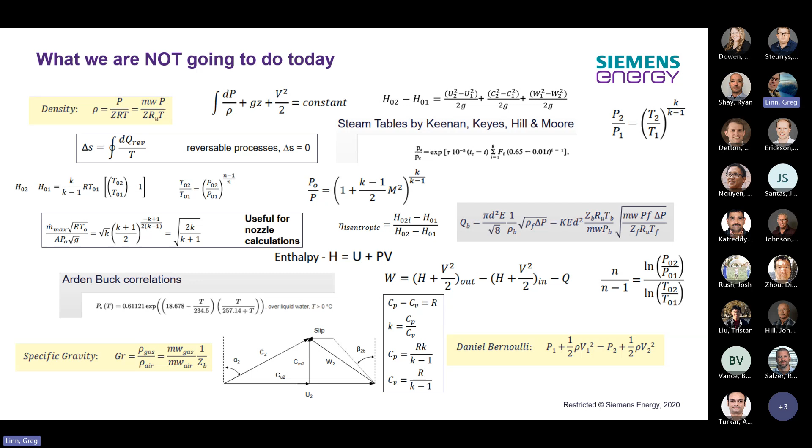By the way, since I see new people, I am an old person. My dad was working here, and he's the one that - when they went into a production meeting, they wanted to play a joke on, I think it was Jim Beeson's car - they took his car keys and actually drove the guy's car into that compressor without his knowledge. He came out of his production meeting, and the whole meeting just walked behind him, and he's like, 'Why is everybody following me?' Then he's like, 'Why is my car in the compressor over there?' So, anyways, I've been alive for a long time, even though I may look younger.

Okay, what are we also not going to talk about today? Customers talk about all the things on the outside of this bubble - obsolescence, reliability, all that stuff, right? But we sell compressors to them and we have to solve their problems, so I'm remiss not to mention that compressors do those things for the customer. They don't really talk about the insides too much unless they're having a problem with it. So we're the bubble. We talk about, from a revamp perspective, upgrades - that's anything mechanical on the compressor, right? Bearings, seals, you know that. But the rest of that bubble that I live in, revamp land, is head, capacity, and efficiency, and that is performance.

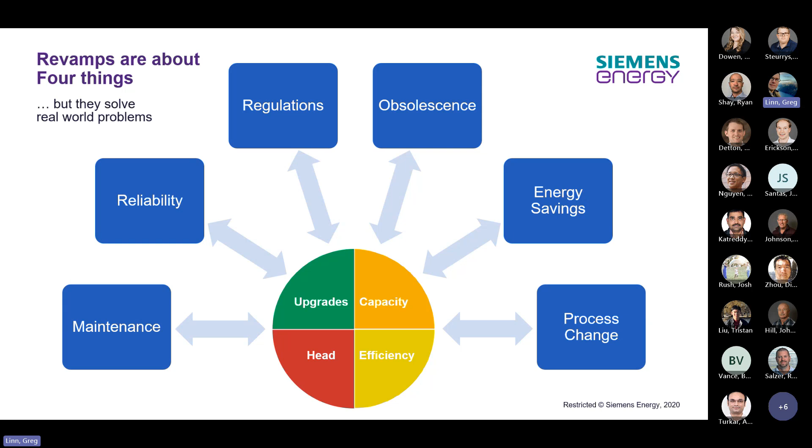So 3/4 of the bubble is performance in my mind. In reality, that's a very small sliver. There's more mechanical stuff that goes on with a compressor than performance, right? But without the performance, you don't need a compressor. So that's how it looks in my brain, a very simplistic bubble.

The other basics of performance, you got to remember this. It's super simple, guys: 5 inputs, 2 outputs, or any of those outputs, power and speed, can become an input. But you got 7 things you're doing. Capacity is this middle thing, flow. The head and efficiency is all baked into this. Pressure, suction temperature, mole weight. There's a discharge temperature in there. You could say that's an output, but these are the inputs, and that's typically the output, power and speed.

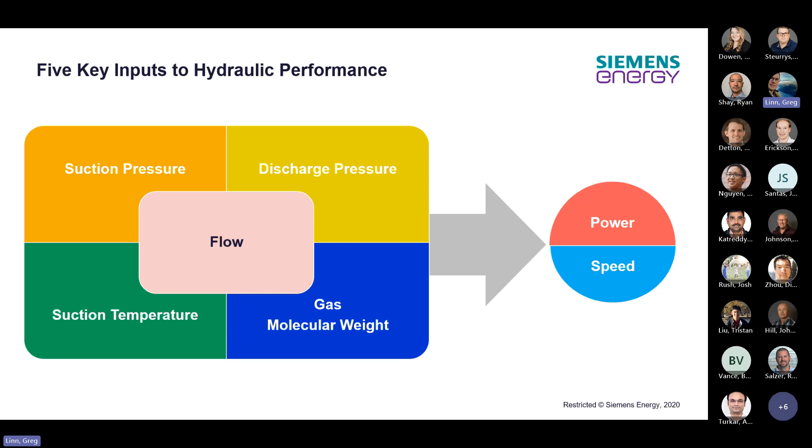Okay, this is what it looks like. Now, the focus of this presentation is either going to be talking about the components in the compressor that make performance, or talking about how we speak about performance to a customer.

Sometimes they'll say, 'Well, how much head are you making?' Nobody's going to say that. They're going to say, 'I need to go from this pressure to that pressure,' right? No one's going to say... there'll be a few people who say, 'Well, I need to make 50,000 feet of head.' They're rare, okay? But this is the way that you talk about compressor performance.

And on the right-hand side of this screen is the head equation if you're a piece of gas and you need to get from one place to the next. And that's how the customer's going to say it: I need to get this gas to that place, that's pressure 2 versus pressure 1.

And I got this gas that's baked in the R equation, right? That's your mole weight, and it's sitting there at whatever temperature. And baked into this is some efficiency components and other high fluid stuff. I told you, we're not going to do the math. That's the equation, there it is.

On the left side of the screen is a really easy one. That's the compressor side of the head equation: Mu, which is the head coefficient, U squared, which is the tip speed of the compressor, and G, which is the gravitational constant. That's it.

But you say, well, what's the head coefficient? Well, that's a very complicated thing to go and calculate, okay? But each compressor has a mu value, a head coefficient. Inside the compressor is multiple stages, and each one of those stages has a mu value. Okay, so I'm not gonna peel into this a lot, but I want you to have that impression that this curve could represent a stage, it could represent a section of compression, or it could represent multiple sections of compression.

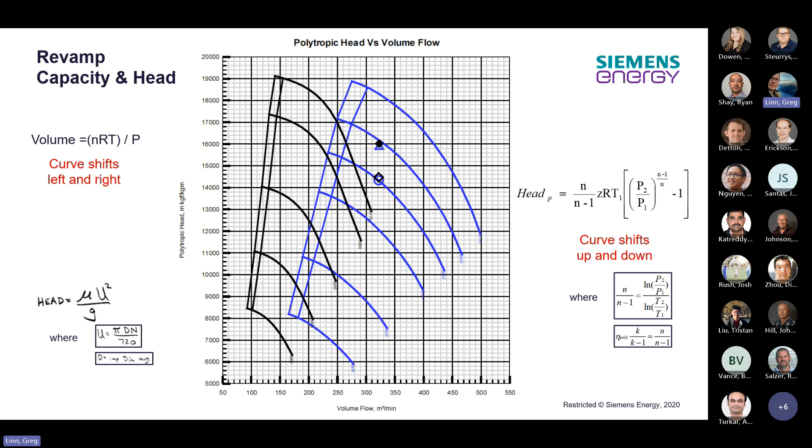Within limits, I got some other graphs, we'll see how that varies. And you can plot them over top of each other, and it gets a little fuzzy. If there's massive changes, and I don't have this in here, there's a curve that tells you how long that will stay accurate for. I didn't put that in this presentation. That's why I said the presentation is not done. It'll probably get in there eventually.

Okay, so what is compression? I was going to get that little picture off the internet where everybody compresses the cans, right? Where they heat the can up, they put hot water in it, and they have a bowl of cold water, and then they turn the hot can over into the cold water, and then it crumples. Okay, you just saw it in your mind.

But that's what's going on here, is that you take gas from one pressure and temperature and energy state, and you take it to a higher level of pressure and energy, okay? And you compress it. So we're going to visualize that a couple different ways. So head: specific energy required to compress a given volume of gas from one energy state to another. Capacity is how fast you're going to do it, okay?

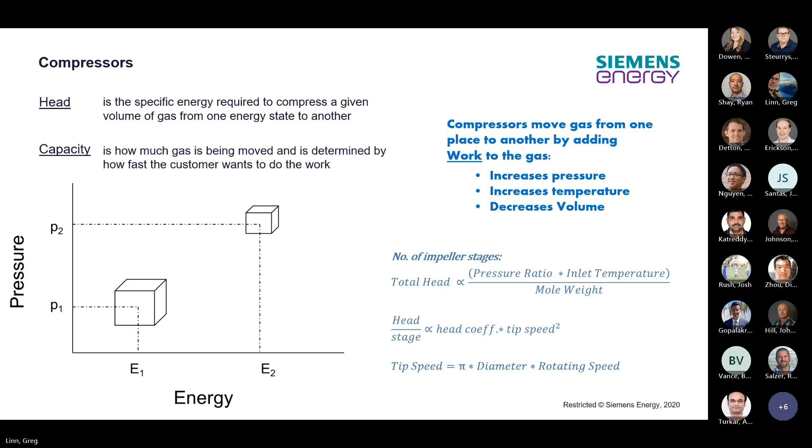Does anybody know what surge is? When you want the gas to go one way, but it goes the other way. Makes a lot of noise - can make a lot of noise, or it could be silent. It can be very damaging or it might not be. Depends on the energy level that's in there.

When I started, when I was a new person, they sent you out to the test stand - we don't have a test stand anymore. It was a very memorable experience. First, if you were a new person, they give you a dry bulb and say, hey, we need this reading, and they make you go up on top of the compressor to turn that. That's just to measure that you're actually a new person and that you don't know they have instrumentation to do that - you don't need that. But I've done it, and it's fun.

The other thing they typically do when you're new is when they're running a compressor, they will go into audible surge with a customer's compressor. It's probably not recommended, but they just want to see how far you can jump. If you're standing right next to the compressor and it goes into a surge event, everything shakes. You think you're in an earthquake, you think there's a jet going by at Mach 1. It's crazy - there's noise and energy everywhere. That's a surge event.

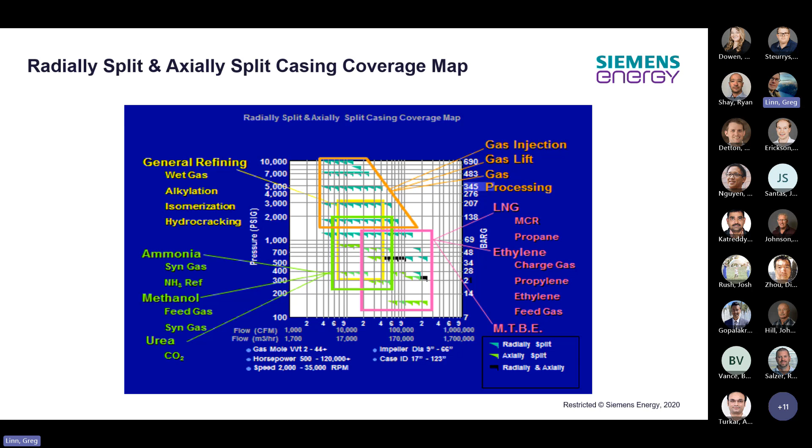The gas has to get in. You have to do some work on it - you have to compress it. And then it has to get out. If you forget to get it in or forget to get it out, you fail. Our biggest problems in the last few years is when people forget these things.

At Hilcorp, we decided to make one of the output things more like a valve, and they closed the valve, so the gas couldn't get out. We did some amazing compression inside that compressor, but it was terrible on the test stand. So don't forget the ins and the outs - these two holes are the most important holes on the compressor. I don't care what rotodynamicists and mechanical guys tell you about oil holes and vent holes being important - these two are the most important. Without the in hole and the out hole, you don't have a compressor.

And impellers are important too, so let's take a look at what they look like. These things are called impellers - they're here on the shaft, right? We all know that, and we're not going to bear down to those levels of things, we're going to stay on the flow path. But the impellers are the prime mover of the gas - the coupling imparts torque to the shaft, which imparts torque to the impellers, and they spin.

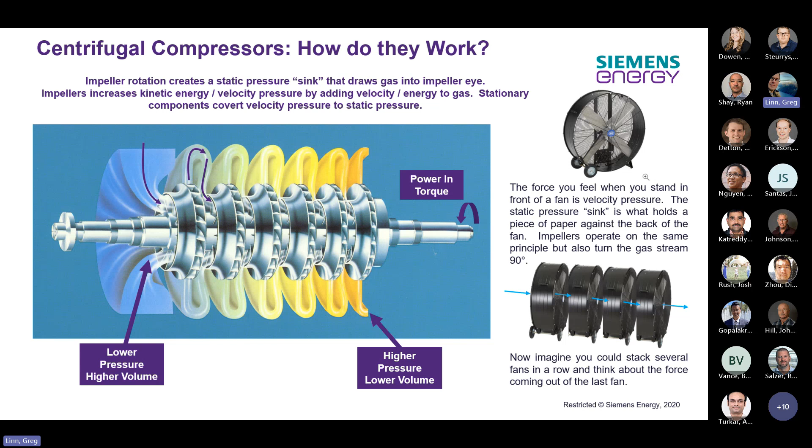This was a Jim Soroka slide, and there's a series of fans. He says, think of each one of those fans as an impeller. I mean, it is - it's just an axial impeller. They usually call it fan blades. There's blades on the impeller.

This is another view of it. This is when the gas goes through. This comes out of the compressor basics spreadsheets and presentations. You'll see a lot of that in here. I just want you to have a few slides that let you visualize the flow.

Oh, you can't see that. Is there a way I can put it? Look at that, I can if I turn around. Okay, excellent - so this little portion right here is where the eye of the impeller is and where the gas particle might go into it. Well, now I can't see it.

So that gas is going right directly into the page. When it gets to the impeller, which is spinning, let's say, at 10,000 RPM, it's going to go around that probably once or twice - it's not going to go from here to there. It's going to go all the way in a circle, but it would eventually go up the pressure side of that blade and then exit the impeller. This is a representation of what the gas particle is going to do, but it's going to move faster and faster as it goes. So when it gets to this point, there's a component of motion that is out away from the impeller, and there's a component of motion that's tangential with the impeller's rotation.

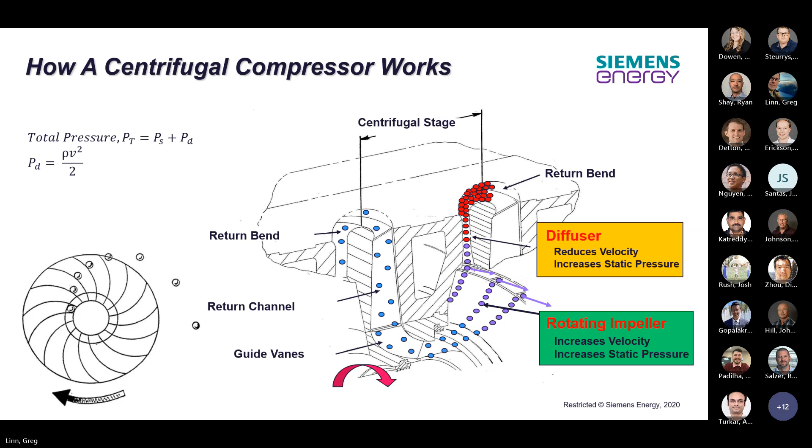I'm going to turn around again. We're going to talk about stages. You have to have a visualization of what a stage is and what the boundary layer for that stage is. This is one of those things that talks about as it goes through the compressor. This is not a representation of a stage - this is several stages, and it doesn't even show where the end is.

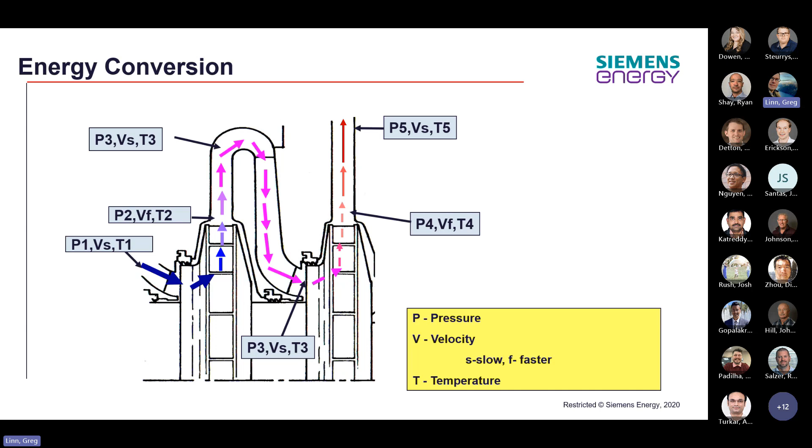That gas that's leaving the second impeller there is leaving the compressor - it's probably going to a volute. We're going to talk about all these components and what each one of those things is doing in the compressor. This is another picture of a stage. They represented this entire thing - the blue area, the inlet guide area, that's a portion of the upstream stage, so that's not a stage. It's a stage and a quarter because it represented an inlet guide, then a stage, and it has the inlet guide of the downstage.

So a stage, and here's a picture of it a little bit better. It goes from the leading edge of the impeller through the diffuser, the return bend, the return channel, and the inlet guide following the impeller, right up until the next impeller. Or if it's leaving the compressor through its volute, collector, flange, you name it.

So a stage of compression is from the impeller through to the next impeller. I'll give one caveat to that: there is leakage. Whenever you have a rotating piece and a stationary piece, you're going to have a seal. There's a labby seal, really tiny on that picture, but over here on the right you can see the little spiky things at the impeller eye cover. That is a seal, and there will be leakage through that.

So we're going to back up. If you look at the diagram on the right, there are station numbers. 1 is at the impeller entrance, 2 is at the impeller exit, 3 is at the diffuser entrance, 4 is in the middle of the diffuser, B5 is at the top of the diffuser, B6 is at the end of the return bend or the beginning of the return channel. B7 is at the end of the return channel, B8 is at the end of the inlet guide portion. There's a section mentally called 0, where we begin, right before the flow comes in. So at the end of the inlet guide, right before the impeller starts, there's a 0 station. There's a 9 station too, but 9 is equal to 0. So that's a stage of compression.

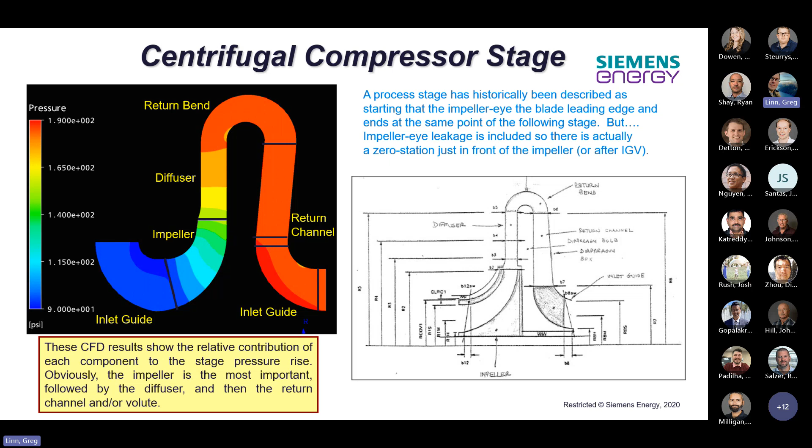If you represent a compressor, we're going to show you a CX curve, what we call the CX curve. I don't know, did Cooper have a name for the head coefficient and efficiency versus Q over N?

The head coefficient, you just call the head coefficient curve. It's a dimensionless curve, we have one of these in here, but we called it the CX curve. I never knew what that stood for, but we called it that. It's a little short acronym.

Station 6 was at the top of the tunnel, at the top. Station 7 was at the entry to the channels. John was explaining that at the top of the return bend, they had a station - there was a 7 and 8, and a 9 was probably where our 8 was. And if you go to Duisburg, which is a 4-letter word if anyone's counting, they have slightly different stations, but they do a really nice job.

They have a spec that dictates every single one of these flow path components. So we're going to talk about each one of those flow path components, get you ready for their specs and how they define them very, very well. They define each and every component, but you need to know what they do. That's the focus here: what does each one of these components do?

So this is a picture of a stage, and I've said the names, but here it is if you ever need to reference it. I don't think there's anything else shown that needs a picture or a name other than maybe the shaft. Don't forget the shaft is under.

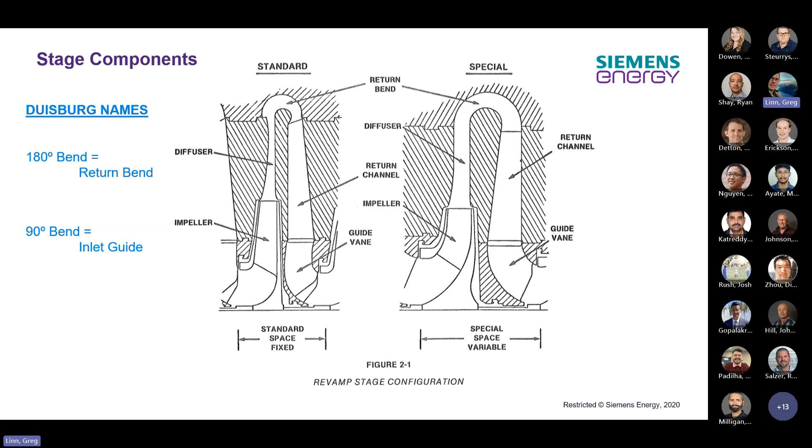Okay, here's yet another representation of this. I like this, Tang had this in his presentation. I thought it was really great because you don't often see this.

So you go, what's static and total pressure? Remember, I'm not a smart guy, but just remember, static pressure is what you might measure with a gauge. Total pressure is if you get gas moving, there's energy in that gas. So there's a total pressure. I never got to the point where I understood it. Doesn't matter to understand it because you can make it through your entire life without understanding. John probably understands it, but we won't get into it.

The pressure you get if you stop the gas. So it has energy in it, has work put into it. So the gas goes really fast right here at the exit of the impeller. And then through the diffuser, what are you doing with the diffuser? We'll get to it, but you're slowing the gas down to recover pressure. It's called pressure recovery in that device.

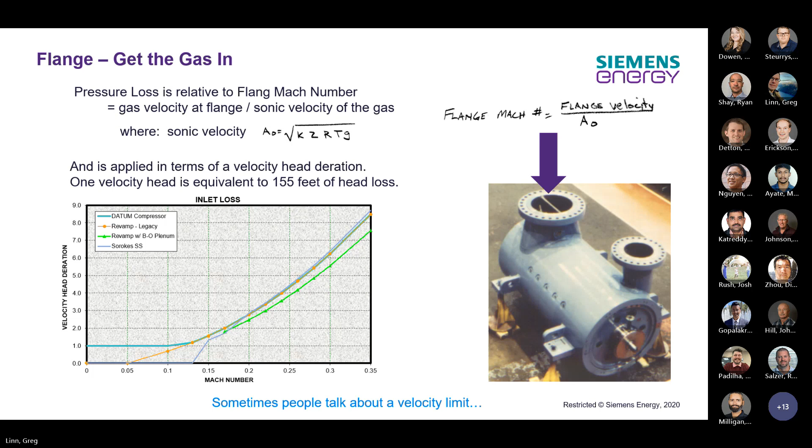You don't want anything to turn. You don't want to go around a 90-degree bend inside a compressor. That's less efficient and you get pressure loss, just like flowing a pipe. So you're going to see things that I term as called sexy. The sexier it looks, the better it is. That's just the way compressors are. There's no other way to put it. Yes, Joe.

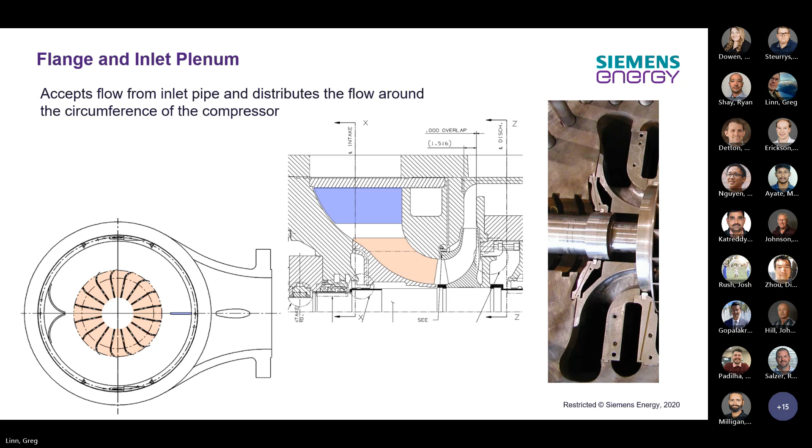More views, I like pictures. They say pictures are worth 1,000 words, so I've got about 5 billion words in this presentation because I just went and got a lot of pictures to talk about. There's the words on the screen.

Let me break this down: splitter vanes, plenum vanes, seagull vanes. There's a lot of variation in these designs. These are some old ones, but they were very important. This was a high flow machine where they had performance problems and separation of the gas. They used to do it this way.

I've seen many configurations of having these additional plenum veins in there. Sometimes they need to split the gas, and it really comes down to the designer. There's different aero people, different product people, and there's reasons to put this stuff in. I won't say I was ever privy to all the thinking of why they did it, but I'll show you one picture in the next slide of why sometimes they're put in there.

If you see this, the innermost set of veins looks like a little star, a weird star with many points. That's the inlet guide vane portion. Immediately outer of that is a set of veins - let me see if I can point at it - so this set of veins there. I want you to note the shape of those, because I called them finger vanes. I think that was kind of the Dresser terminology for it.

The finger vanes are catching gas as it goes around the plenum, and it's uniform, but not all in the same direction. As soon as you get inside of the guide vane, you can see these are all uniform. But these finger veins have to have a little bit of turn to capture the gas.

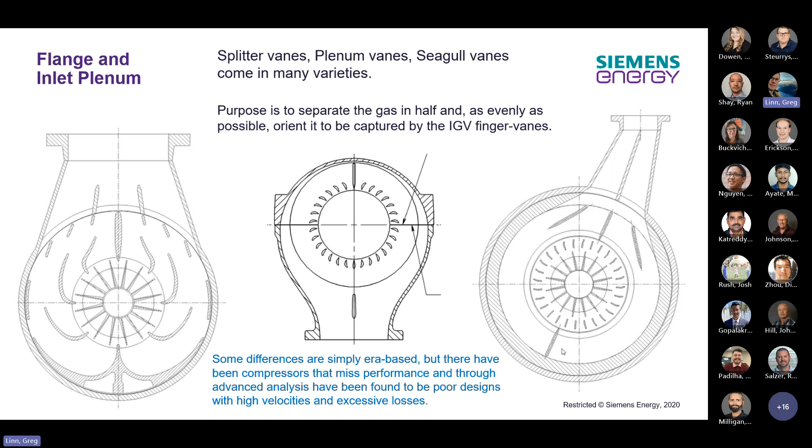The splitter vanes at the bottom, as gas gets to the bottom, it says hey, stop going this way, I need you to turn and go up into the impeller.

I didn't finish the slide, sorry. But here's another picture where they said, hey, we're going to get rid of the splitter vane and go to a seagull. That was a really popular thing that Dresser Rand did - we use seagulls in all the datums. And I think it's a pretty good design.

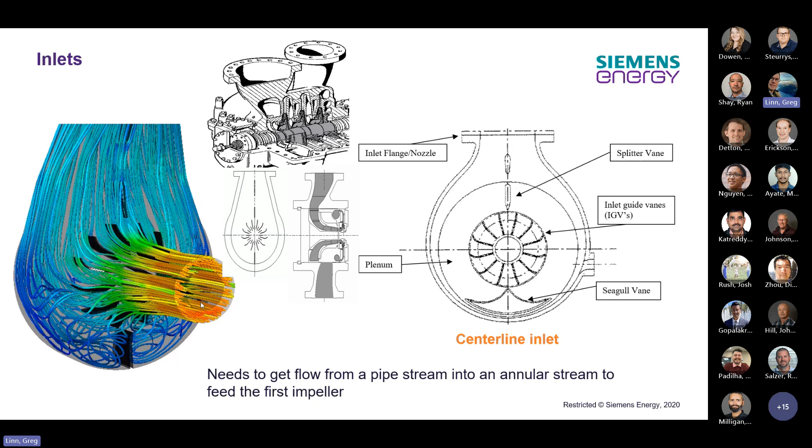I don't have a picture of the flow with a seagull, but I can envision it being way more smooth and creating less of a pressure differential top to bottom.

But you can see that they have a variation, even though that's just an inlet guide. There you can see it has the finger vane shape to it, catching gas coming down each side of the plenum.

Getting the gas from the flange to the first impeller, you can treat that like a valve. We're going to see something called movable guide vanes - you can literally put a valve right in your compressor.

If you don't design this with intention to keep the gas moving smoothly, and don't accelerate or decelerate too fast, you'll ruin the performance, okay?

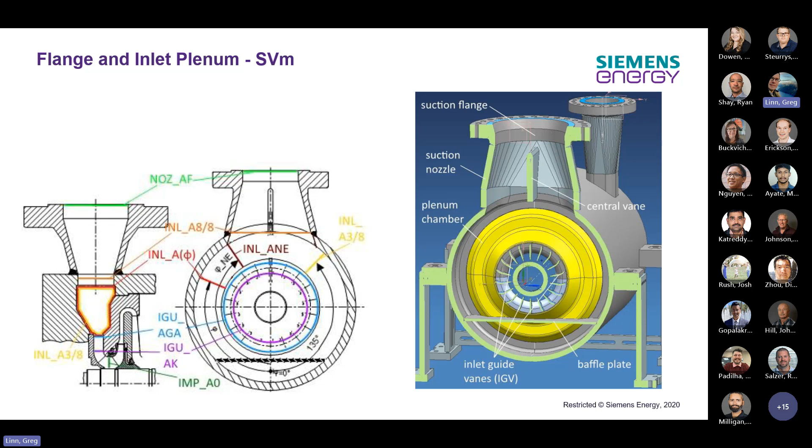Another picture of that, and why I included this duplicate, is that in Duisburg, in their specs, they started to put these rough guidelines in. So you'll see a few pages of this where they say, how much area should you have here, or how much area should we have in the plenum? They start giving some rough approximations in relation to the impeller eye area.

So your first stage, this is the first component you're actually going to measure when you get into Smart Perf or any other performance program. You're going to say what's the capacity the customer needs, and you're going to take the volume and size the impeller for that. You're going to try to determine a tip speed and set a capacity. Q over N is the measure for the first stage.

That area of the impeller, working backwards, if you're new equipment, sets the size of the plenum, the inlet guide in front of it, and it'll set the size of the flange. You can say, well Greg, you said make sure the flange is big enough when you start. Okay, but that's not how they do it in new equipment land. They size the impellers first, and then everything goes backwards out to the compressor.

Another closer version of that, and you probably live in the world where product people see this through the design of the compressor, is they'll measure the area coming through that inlet guide vane. So this one has a little horizontal dash line. To me, that's the break line of where you've got the finger vane part and where the guide vane part takes over. So that's the primary purpose of an inlet guide.

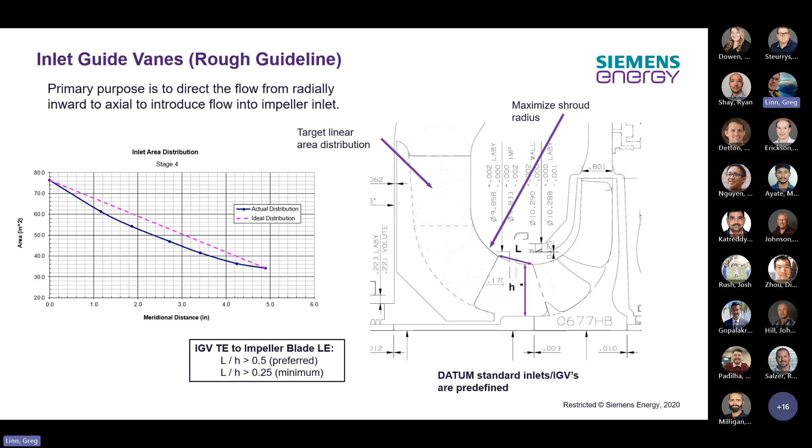The purpose is to take flow that's directly down the page to directly left to right in the page. Now there are times they don't. The finger vanes, we've been talking about that a lot—that's when the gas is not going directly straight down the page. When you get to the end of a diaphragm, you'll see a difference in that guide vane, because the return channel presents the gas straight into this guide vane portion. The guide vane also may decide not to keep the gas straight, okay? And I've got a slide on that.

The plenum area and the inlet guide—when you need to take up some axial stage space in a compressor, this is primarily for revamps or for new equipment that has a future build. I've seen compressors with extra stage spacing built into it for the future. Here's some examples of what that looks like.

If you want to make it a science, you could say I'm going to do a CFD of this bridge over, and make some decision points in the contract to decide what's the lowest amount of loss I could get. That's an awful lot of effort. That's an awful lot of time.

If you're going to do it, I know engineers, they love to change something. So you come up with a concept, you do the CFD, and you say, well, it could be better if I did this. Well, that is more time, and you might already have your parts on order. If you want to make a bridge over that looks like the top picture, that's a whole different mess of material and cost than if you looked at one of the bottom pictures, right? So you can't CFD this and conceptualize it during the contract. You can, but it slows up the contract.

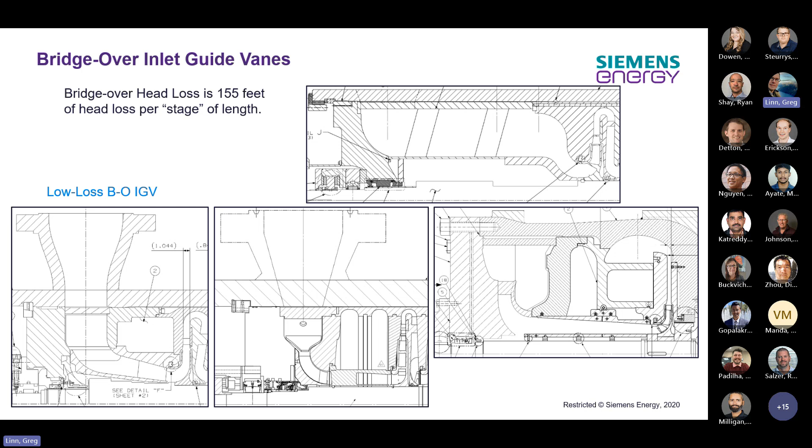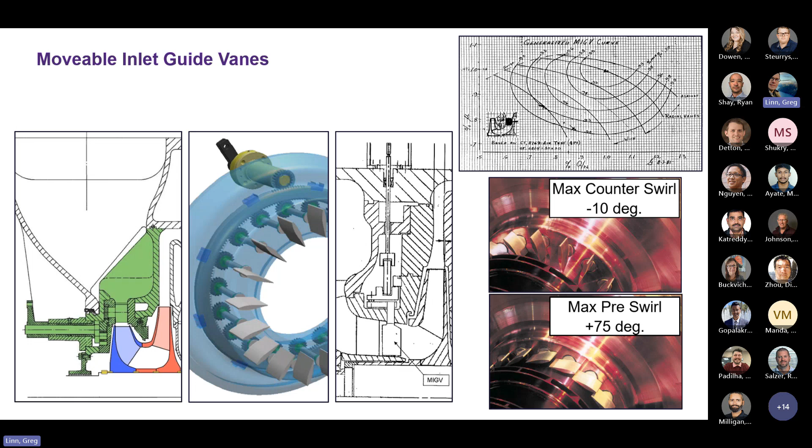So the guide vanes have a purpose and they should be sold more often, but they're not. They're only using single stage compressors. A lot of those in Duisburg where they're doing those 4-poster machines still, every single one of those has a movable guide vane because it's so integral. They can make a massively controllable compressor, they can run all over the map, right, by using these adjustments.

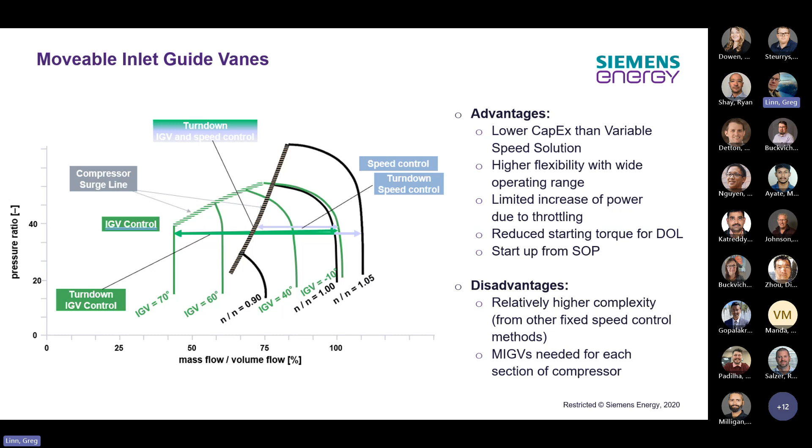But putting a movable guide vane in with a multi-stage, multi-section machine, let's say if you had 9 stages, you're only affecting that first impeller. So you still have volume reduction effects, and we're going to start talking about volume reduction, and you'll see it's not really conducive to putting a movable guide vane on 9 stages. A movable guide vane with 1 impeller, super, super productive, right? A movable guide vane with 9, it's not as valuable.

So it was a mixed flow that we built a radial diffuser on. The mixed flow impellers is where they say you start losing efficiency a little bit, but still very efficient compared to some of the low flow impellers.

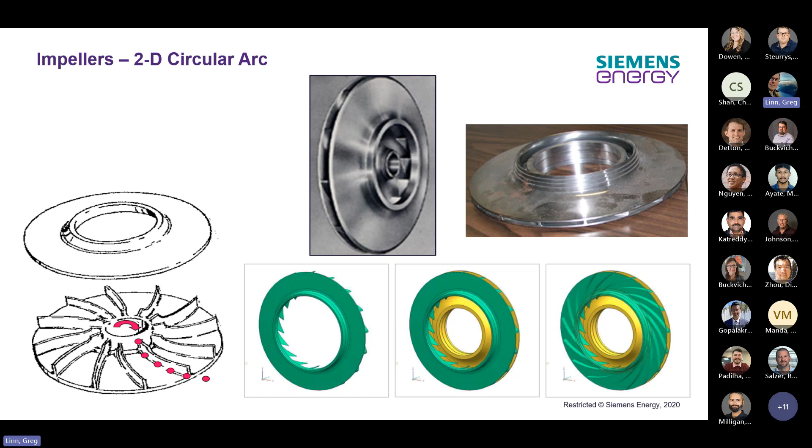I don't have anything more to say about that. Jim Sorokes used to call them arbitrary blade shapes. I'm sure that was his own term, but he talked an awful lot about that, about blade shapes, and he would say, oh, what impeller? He had conical, he had several different terms. I'm not well versed in that, but I heard them all my life. I know that the arbitrary one - if you get into Duisburg, they call it knowledge based, and they've got these vanes doing this type of thing. When you get to high flow, high efficiency, you're going to see an impeller with a lot of back sweep to it, and the more back sweep, it changes the head profile, changes the efficiency.

One of the things I think was on that slide - the impeller is the only rotating aerodynamic component, and it's the only component that adds energy to the gas. So that was the key point from that slide. The impeller is the key. Jim Sorokes used to say, impeller efficiency.

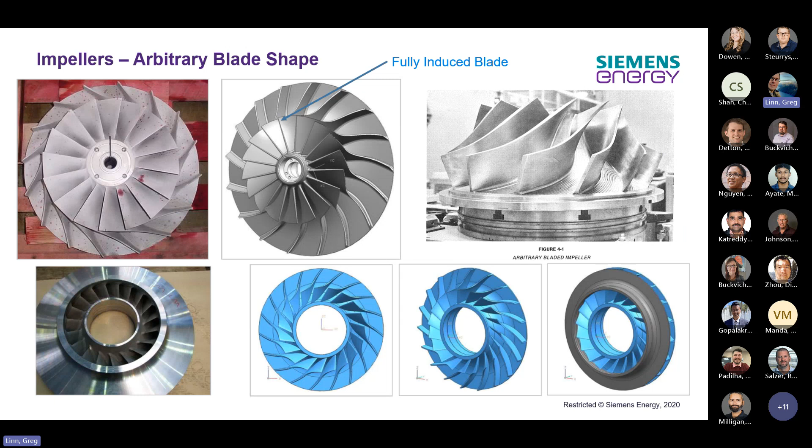Does anybody have a guess? I'm sure you understand it's higher than stage efficiency, right? Because it's really good efficiency. It's not 100%, but 96% is an average impeller efficiency. The stage behind it will drag it down to sub 90. But the impeller itself is really efficient.

Some of the things that drag it down - let's start talking about this. Diffuser vanes - what is a diffuser vane for? It accepts high velocity, high kinetic energy gas from the impeller. It begins to convert it to static pressure by slowing the gas down in a very controlled manner.

First and foremost, as the gas leaves the impeller, it's going to go up in diameter and slow down naturally. Just through the diffuser, that's the thing. But then we contain this with walls in the diffuser passage, as a shroud and a disc side of the diffuser. The diffuser can have shape - you may see some that look straight, and some that taper. That's the aero person saying I need to change how the gas is slowing down.

Tang had this one - it was big for him, and I think this is important: no negative overlaps. You don't want the gas coming off the back side of this impeller and slamming into a wall. That will ruin performance, so alignment's critical. As you can envision, the more narrow that impeller gets, the more critical the alignment to the diffuser is. If you're in a back-to-back compressor, it gets near impossible to get alignment to all the stages.

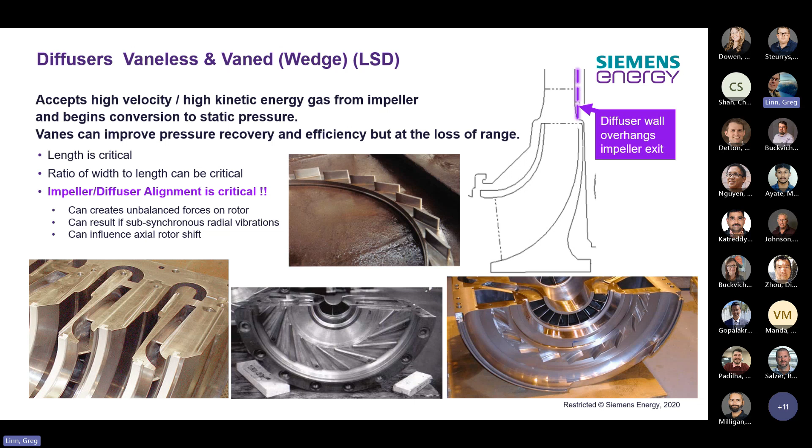You can see here, this one might not be an LSD - if you swung that up, it might hit that, but it's pretty LSD looking. So the shorter those are, the more confident you can be that you have an LSD. Jim Sorkas loved that term because it sounded like a drug that he took when he was a kid - he didn't take drugs, but LSD, the drug. Engineers have funny ways of amusing themselves.

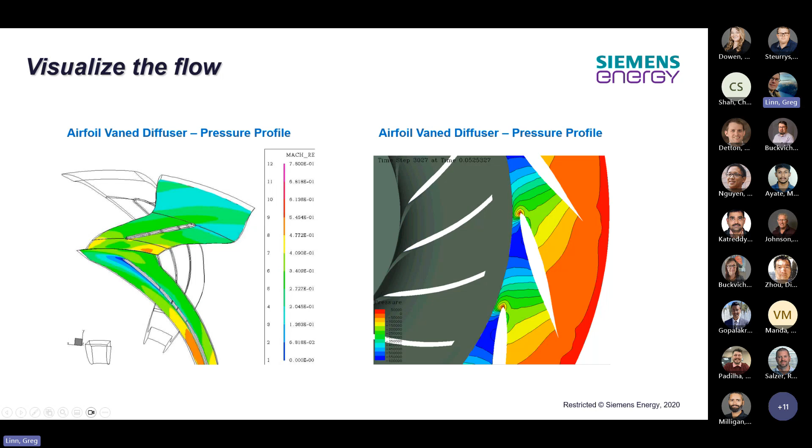You can see the blue and the green swipes at the top on the left. So that's the flow path visualization of the way the gas goes. You can see it's turning over, right? As it slows down, it's going up and up in diameter, and it slows down. The tangential component of its velocity, nothing's really imparting any change to it, but the radial component of that velocity is slowing down because the area is increasing. That's why it appears to change directions.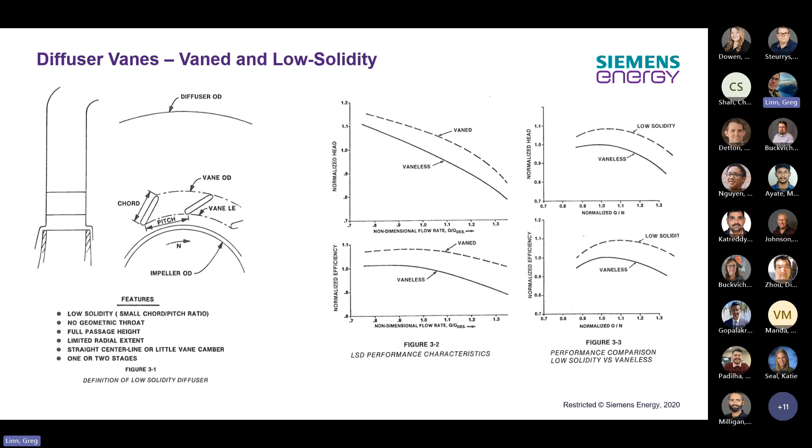Just some more pictures of the vane. I don't want to belabor this, this is just for reference in this training material. If you ever open it up and say, what does a vane diffuser get me? It gets you better head and better efficiency. This is a vane, full vane. This is a low solidity. Almost the same type of behavior.

One thing that chart doesn't show, and I don't know if this is real data, this is someone's depiction of it. But if a vaneless pass gets utilization of the entire flow range of the impeller, a vaned pass is going to shorten the range. It must, because there's an incidence. So I don't have the loss bucket, I need to find the loss bucket in here. But the incidence angle of the flow leaving the impeller, hitting the vane, there's a design point, that'll be in the middle of the curve, probably at peak efficiency. As you change the flow rate going through the impeller, it changes the incidence angle that the flow leaves the impeller, so the incidence with that vane.

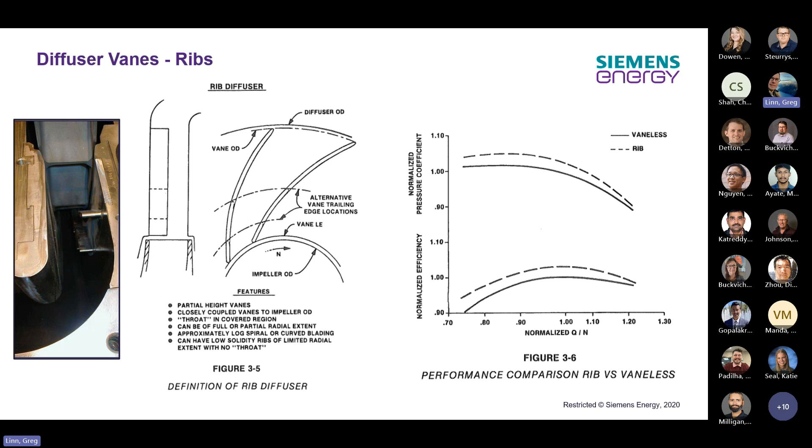Here's another picture of it, of a ribbed diffuser. That's a terminology when you don't have it all the way across the channel, then we call it a rib diffuser, usually used for super high flow impellers. The 1653 family has it as a default, you can't even build them without it. And then one that doesn't exist, I've never seen it, but in theory it makes even better efficiency. So if you compare these two plots, this gets you quite a bit more head.

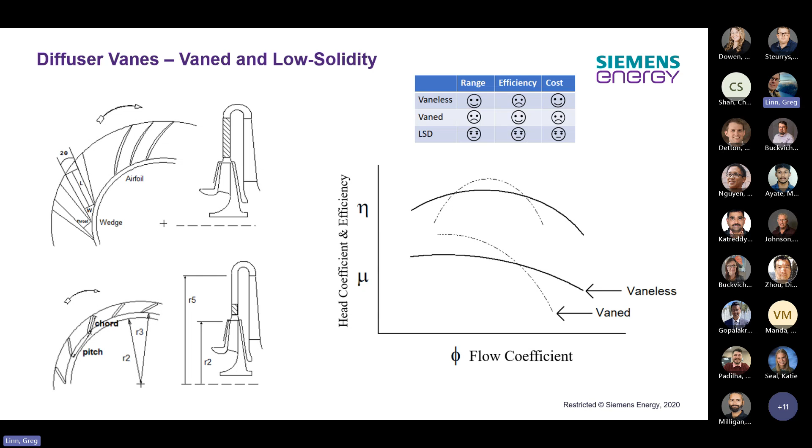We are doing process equipment. They want wide ranges, they want wide everything. But efficiency is sometimes important. When efficiency is important, we use LSDs. Or if we're short on performance and think we're going to fail the performance test, we use LSDs. So we use LSDs a lot, because it's a catch-all. It's easier to sell a revamp if the efficiency is high too.

Next flow path component is called a return bend, the turnaround, the 180-degree turn, whatever you want to use as the terminology. Its purpose is to take gas that's leaving the diffuser. It's going out, it would just go into space. We have to turn it around and send it back to the next impeller. So that's all it does. It takes gas that's going out where it says B5 and puts it in where it says B6.

Some of the components you'll see in a return bend is this bulb that's on the diaphragm. This picture is of a very large bulb. Doesn't have to be that big. You're going to see some examples where they're much smaller.

Also, as you slow the gas down, it's still diffusing. The area is still increasing as it gets to the top of that bulb. If it's still diffusing, it means the gas is still slowing down. If the gas is slowing down, it means you might have more volume in that gas. So they usually typically want to increase the area to promote continual diffusion.

A lot of times, if you look at datums or old compressors, you may see no increase in area from the left to the right side of a return bend. Don't be alarmed, it's dependent on a lot of things - gas densities, what we're doing with the gas, the pressure, the volume reduction, all that plays a part.

You can see this as high as a 50% increase. I've seen them actually where it pinched, where it was 90% of the passes on the left. I personally think that's a mistake, but the guy that did it is not alive, I couldn't ask him.

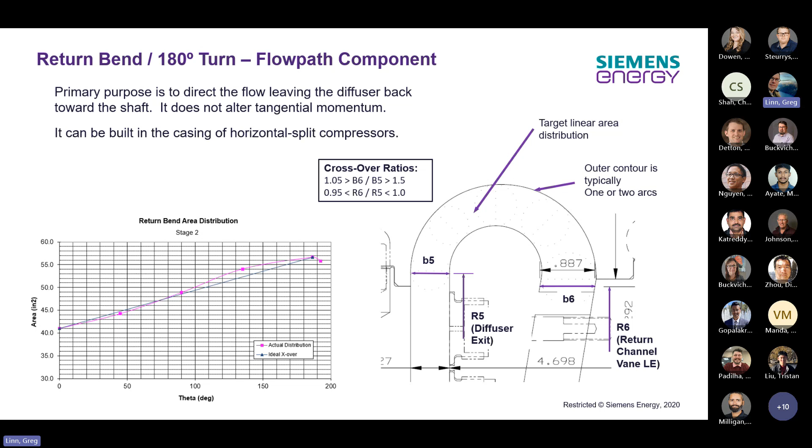If you are somewhere in the 1.5 to 1.7 range, you're in that sweet spot where most impellers and most stages can live with it without a major problem. When you get to really low flow coefficient stages, you have to start reducing the diffuser radius ratio. The design of like the 275 HBA drops the standard from 1.5 to 1.42, and if you go to the really small flow coefficients, it goes to 1.35.

Duisburg has had a similar chart here where they say, here's the optimal based on flow coefficient. What we do here is we just get a correction if you make it too short. We live in the revamp world where we don't want to make them long - we almost never have that space. We're almost putting 10 pounds into a 5-pound bag all the time, so we shorten diffusers. We put a natural derating into this to slow the revamp engineers down from being too optimistic. We have to put some derating in there for those stages. So that's just a chart to remind you.

If you get this presentation, we do have a shortcut to this tool that allows you to lay out the stage and then predict your diffuser radius ratio.

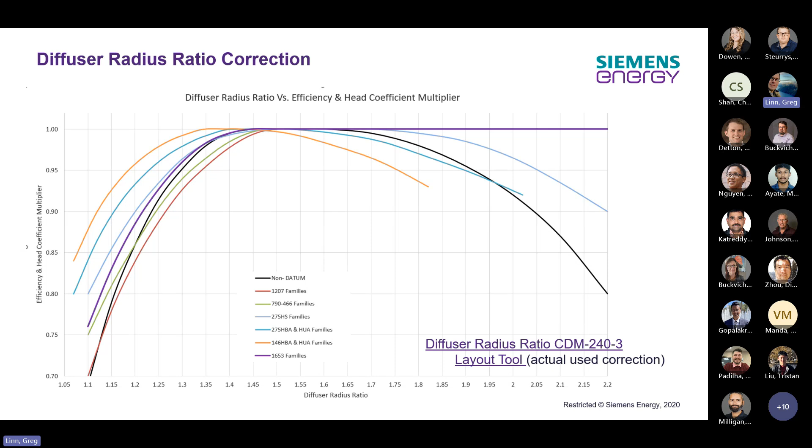Moving on. When we leave the return bend, we get into the return channel. Its purpose is to remove tangential velocity and swirl that was put in there by the impeller, and we return the gas to a radial direction - radially toward the shaft, so directly inwards.

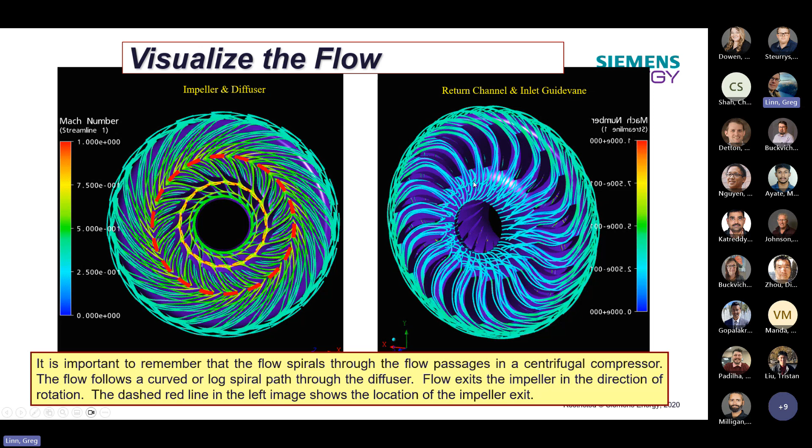The way they got around it is they took this 2D approach to return channels. If you take this and think about it being straight across the top, right here you see these vanes come out straight, there's a 2D profile. So Duisburg's got a new 3D return channel profile, first time I've ever seen it. It allows you to have a very short diffuser and return channel, so you can put a higher diameter impeller into a smaller compressor. 3D return channels, brand new.

It is adaptable to datums, you can get those designs. They're putting them in the datums for SVM. So that's a limited amount of datums, but it can be adaptable to any stage.

We used to do 3D? No. The 2D stuff came first, where we didn't bring it radial, turn it totally radial, and then turn it with the guide. Right, when we had separate guide vane inserts.

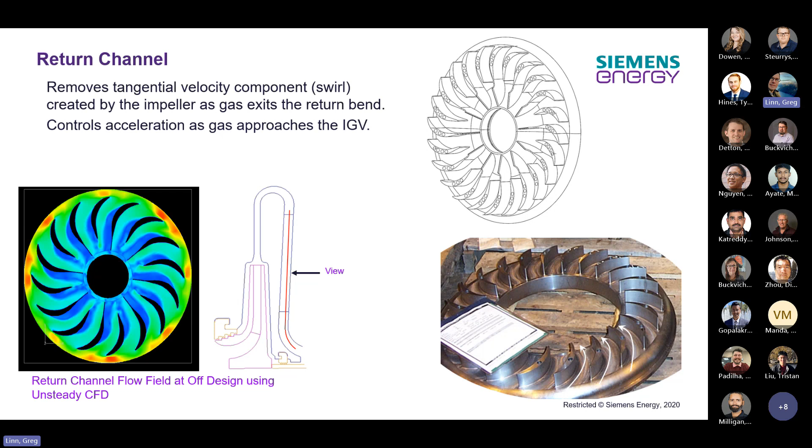Okay, inlet guide vanes. This is the last flow path component before we talk about getting the gas out of the compressor. Between two stages, the last component in the flow path is the inlet guide vane. We already talked about them once, so it's kind of the same thing. As mentioned, they accept radial gas, and by Dresser-Rand definition, they accept radial gas and turn it to being parallel with the shaft. That's the only purpose of an inlet guide.

If you're doing something different, then you're in a different portion of the flow path—you're up in the return channel. So this is just the 90-degree bend, as Duisburg calls it, and the component you can see...

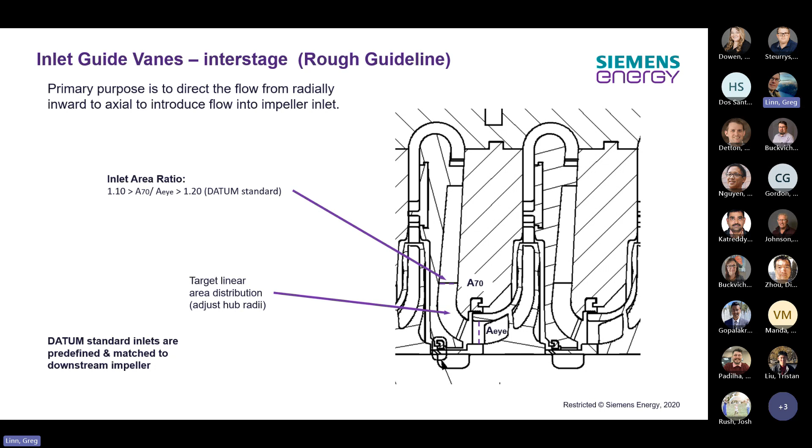The impeller area goes up the stage space to the A70 labeled on that drawing. Then from the impeller downstream, you go through the diffuser, the return bend, and the entrance—B6, the entrance to the return channel. That's from the impeller downstream. So upstream to this point, the exit of the return channel, is upstream from the impeller, and from the entrance of the return channel back is downstream of the impeller. That's what sets the areas.

As we've been talking about, you can shift the flow that goes to a stage, and this is the performance part of it. So with guide vanes, you'd say, 'that has nothing to do with performance'—yeah, until you determine to make it have something to do with performance. You can shift the flow with rotation of the impeller, and you get less capacity and less head.

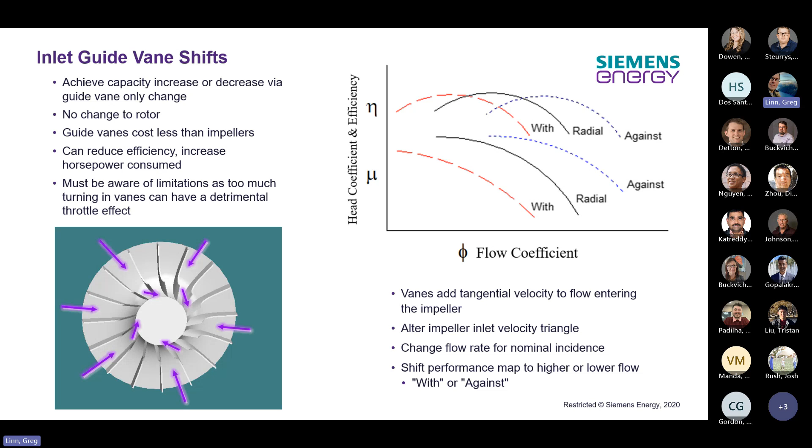And you can shift the flow against the rotation of the impeller, and you get more flow and a little bit more head. In both situations, I dropped the efficiency curve on these. I think the most efficient way to do it is to bring it in radially. I'm not sure, don't quote me on this. You could go run those calcs, but I don't think you really affect efficiency all that much at all. But if there was any effect, it'd be a little bit less, all in all, if you had to say there was any change.

Now, the last component we need to talk about is getting the flow out of the compressor, and this is called the discharge volute. There's a couple of different types, but traditionally we like to use a scrolling volute. That means that at one portion on the bottom middle, the black background, let's talk about that one first.

At one point, you're going to catch gas coming up the diffuser, and you're going to have very little gas. So the very first element enters in here, so you have a small channel. As you add more gas, you need to make it larger and larger. If not, you're going to choke the flow, and that's going to have a higher pressure loss.

So we size the volute based on the discharge flange. The discharge flange should be sized based on how much volume flow you have exiting the compressor. This gets a little bit complicated, and sometimes you can't pair the volute with the flange if you're in revamp land. So we've had an awful lot of discussion about this, yet it's a science that we've just now started to do well, this in the last 2 or 3 years. Why? Because we've had a few of these projects where they were done incorrectly, and it made it very, very apparent that this was a key contributor to our performance downfall.

Scrolling volutes are nice. We don't always find them. Sometimes you find a collector, that's the one in the middle. The picture in the middle, you can see it stays fat. There's more loss involved with that because you're not controlling the flow. That first element that dumps in is dumping in all by itself. So you have a huge area, so it can go anywhere it wants. So collectors aren't perfect, but sometimes that's due to cost or due to other situations that might be what you have to deal with. It's more lossy if you have a collector, and you'll have to deal with that by yourself or with an aero person.

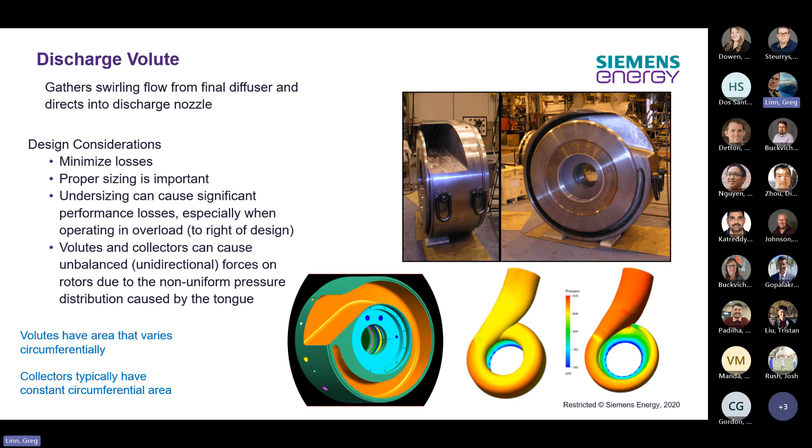It can exit tangentially, or it can exit - most of those pictures are tangential. The one on the bottom right is kind of radial. It's got a little bit of a turn to it, but tangential looks like this one here, where it stays at the OD of the stage. You can see two tangential discharges in that top middle picture. The other is radial - radial just means that if you looked at the flange, it points at the center of the shaft. If it's pointing at the center of the shaft, it's radial. If it's radial, you have to do the turning in the volute or in that flange portion as it transitions from the volute into the flange.

There are 4 different volute styles in the Datum playbook: internal, external - where you build it on the outside of the case - and then the D is where you've got a case OD that's huge, and then you just put the stuff inside. We've seen all 4 of this style of volute, but it doesn't really change what the device does, right? It's still collecting gas and you're moving it.

If you ever need to size in terms of a Dresser-Clark, Dresser-Rand design, everybody does this differently. We use Qd over N. It's a dimensional - well, it's not dimensionless - but it's a variable that we use to say how big the volute is.

We apply a lot of fudge factors inside the smart perf, or cent perf, that looks kind of like this chart, and we like the way we do it. We like our loading to be between 70 and 90% - that's where this blue band is, that's the peak. This is the loss bucket curve. If you get over a certain amount of loading, you have to make sure you have enough correction for it. All of this correction, calculated using the fudge factors, gets applied to the last stage - it takes the mu efficiency of the last stage and multiplies it by whatever we say the correction is for the volute. You can screw this calculation up really easily.

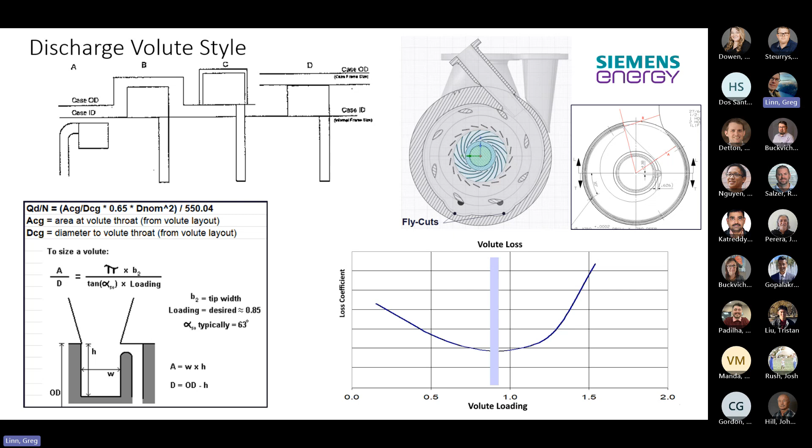When we get to doing it, there's an awful lot of discussion - we have whole training classes just on the volute itself, that's how crazy it gets. From our perspective of just general performance, you have to know one thing: you should be able to repeat it. You have to get the flow out, don't make a blockage, whatever you have to do. If you have a radial discharge, like in the old IR blowers, you may have a radial discharge, and on the top portion, that's a datum up there.

I put it as a thumbnail - it was a datum, back to back with a radial inlet. The customer didn't need 2 sections of compression anymore, so we converted that to be a straight-through machine. We used what I call a reverse inlet - I don't know if it has a term. IR made these things where we put a diaphragm to take the swirl out of it, reduce it, bring it back to radial, and then use a 180-degree bend essentially to enter it into a plenum, a discharge plenum that worked exactly like an inlet in reverse. That's why I call it a reverse inlet. No one's ever used a terminology I like better, so it sticks.

I will tell you that there's no additional loss over a typical volute. Some people will have you put an additional 2-3% of mu and efficiency loss on the stage. Okay, I'm going to point this out on the slide - remember where we said a stage goes from impeller to impeller, right?

So the stage goes from here to here. On the last stage, whether you're going through a reverse inlet or a volute, your stage is going from this impeller to that flange, okay? All you have between there and there is one calculation in Dresser-Rand land, which is called the volute loading.

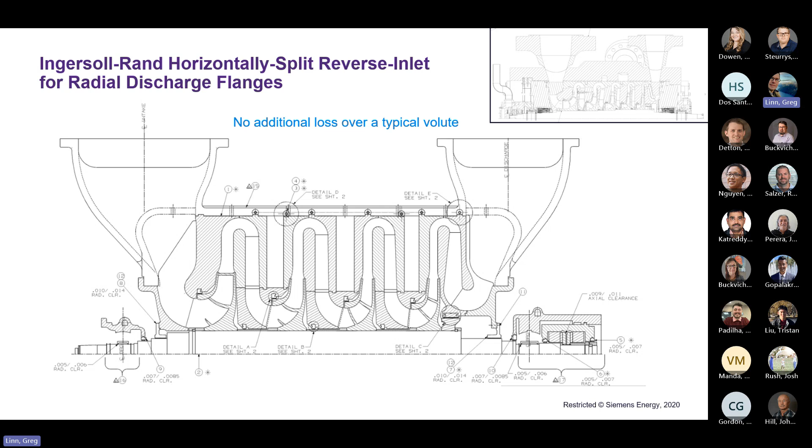No one in 30 years of doing this has asked me that. But I got into the habit, if you look at my hand calculator, I've got discharge Mach number, and I pay attention to that because it's flow through pipe. If you exit this compressor at 0.4 Mach, you should tell your customer, I think your discharge pipe's a little too small, because that's noise and that's loss. That's great that you got the pressure to their flange, but they're going to want to do something with that gas. So just be mindful of Mach number both in and out. That's all 3 components, okay.

Oh, I had a whole slide that said that. Okay, so that ends that section.

Wow, I went for 1 hour and 43 minutes. I think we could end there, but I do want to talk a little bit. So I'm going to go hunt for a few slides so we can talk about performance curves, if you'll bear with me. Anybody still online? We're good? Yes. I'm on slide 47 of 998.

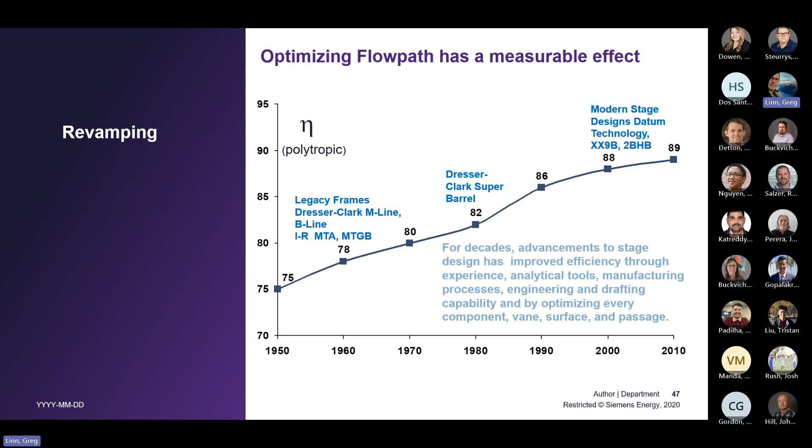So I'm just going to go through a couple of these things and go past them. I'm not going to talk about it. This section was about revamping, about improving efficiency, about fitting in more than actually fits in there.

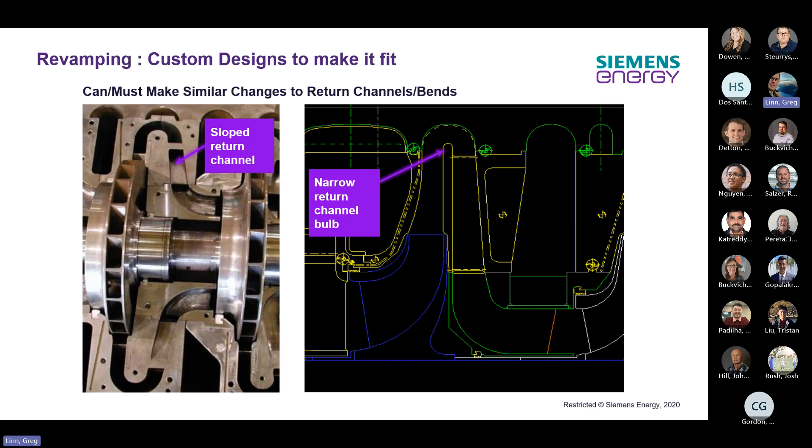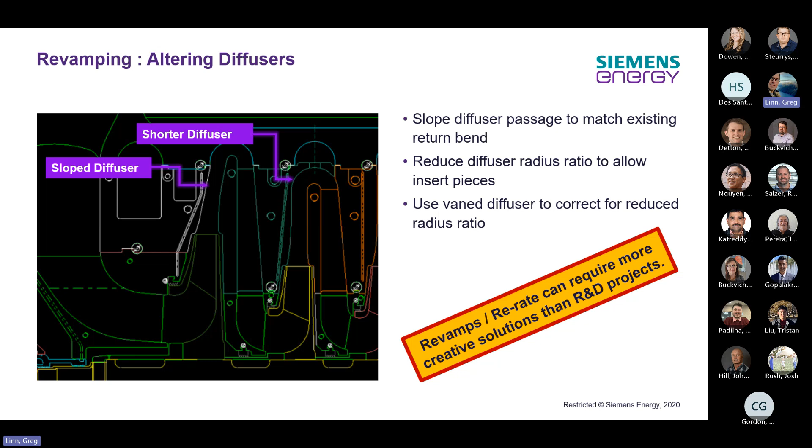There's one of those really tight turns that I told you I argue with Karen about. This is where we change the configuration of a compressor to make what needs to be done fit inside the compressor.

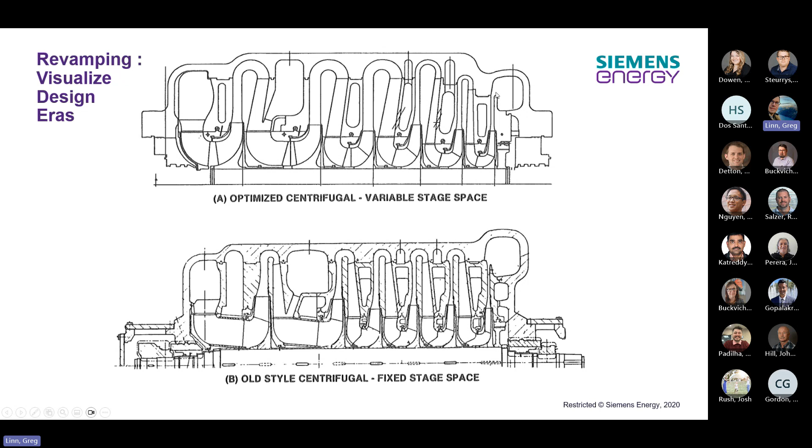Economizer side streams, you can see essentially they're the same, not a real change to how we do that. And then a little bit of a change in how we do the last stage diffuser entrance into the volute, where this kind of opened up that way. And then this was really pointy - we try to make it a little bit more controlled.

We typically say we've got to have a 5% margin to our design. API requires that. We're going to talk about the components of that curve in another one - I've got to get to that slide. So that's where I'm heading. The curve, I want to make a really straight point.

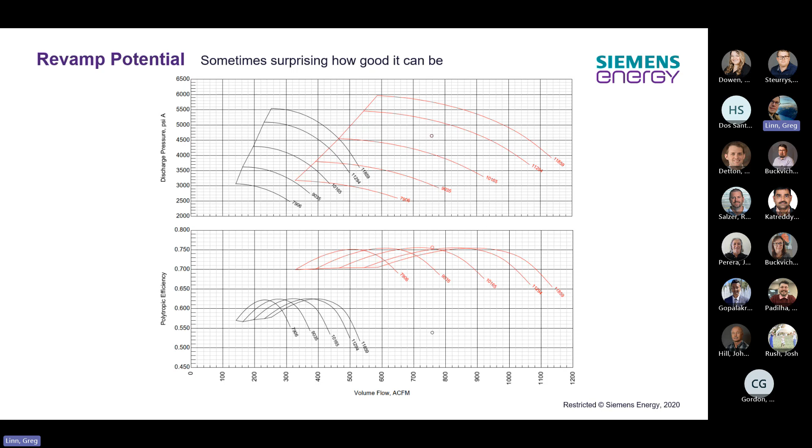You've got the black curve, that was the original. You've got the red, that's the revamp. That's not the same machine unless you got drastically different gas conditions - then you could get that change, right? If you change the mole weight drastically, but this isn't. I know what this curve is because I know it: this is the original, that's the revamp. The customer gave that dot.

If you're going to talk about flows, customers a lot of times, depending on the service, some give you ACFM, but they usually don't. ACFM is actual cubic feet per minute. The difference between actual and standard flow is it's at standard conditions, 60 degrees and 14.7 pounds. There's Russian standards, there's all kinds of different standards. So you say standard, but then you have to know what standard are you using. You'll see that in the data sheets.

ACFM, everyone loves, and that's what we plot compressors to. If you're talking about a compressor and you're not seeing it on a volumetric ACFM curve, switch to it. Otherwise, you're not doing it right. I'll show you a curve that looks like that.

Mass flow rate, I love that. Mass flow rate is pounds per minute. That's an important one. If they give it to you in mass, use the mass. If they give you both, sometimes they give you both mass and standard. The only difference is mole weight is in there, right? That's the standard flow to mass flow. So people say, oh, standard flow is a mass flow.

Yeah, it is kind of. When people say standard flow is a volume flow, correct them, because there's an awful lot of terms between a standard flow and an actual flow. Volume flow is volume flow, that's an important one. You'll see ICFM for inlet. If you see an I in old terminology, that's A, actual. If you see an S, that's really more like a weight flow.

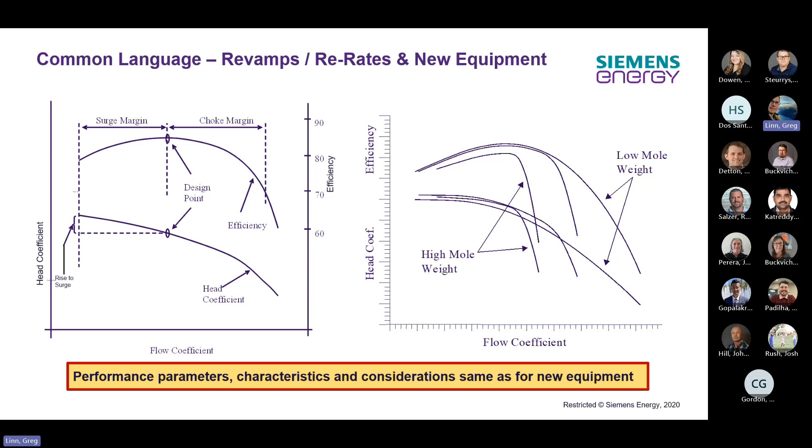Over here, I think I have a better one. I don't want to talk about those terminologies here. Over here is what a typical compressor curve looks like as an output, head and efficiency. But it could be a stage as well. Okay, traditional. Here we go.

Stability. So you're going to go from the design point that the customer specified. If there's a whole bunch, you have to pick one in the middle. They have to tell you. In terms of API, there's a point called the rated point. That's usually the highest head and highest capacity point, the farthest on the right or the farthest up.

But if you have a design point, you're going to talk about curve shapes. Now these are the output curves. This is when you say, I got the whole compressor. You don't typically talk about this on individual stages. You talk about this overall. Stability...

is the measure between the design point and when the compressor surges. You just take that difference and divide it by the design point. So let's say if this was 10,000, that's 5,000. You'd go 10,000 minus 5,000 equals 5,000, divided by 10,000. So your stability would be 50%.

Turn down. Turn down, I don't have a variable speed curve, I have this later, but turn down is the same thing, except stability goes on a constant speed line and turn down goes on a constant pressure or a constant head line. And I've got one of those to show you, but I put the definitions here.

Rise to surge is how much head rise you get between the design point and the surge point. API requires us to constantly rise to surge - you have to have a constant rise in head to surge. If this drops over the top, if it starts to droop, you have to cut the curve - it's surged, period. You will see old curves drawn all the way out, especially with movable guide vanes and other things. But the API requires you to stop it if the head stops rising.

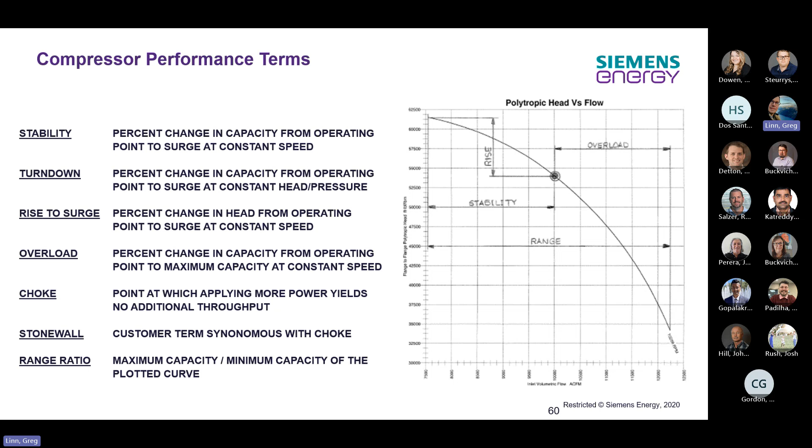I have slides that go through each of these and show it visually. There's the turn down one - I wanted you to visually see that turn down. Surge goes up this line, turn down goes straight across the head or pressure curve until you hit the surge line. So the surge line is always on a slope - if you see it vertically, it's wrong. If you have a single stage, it's probably more vertical, but if it's truly vertical, it's wrong. I'll just say it's always wrong.

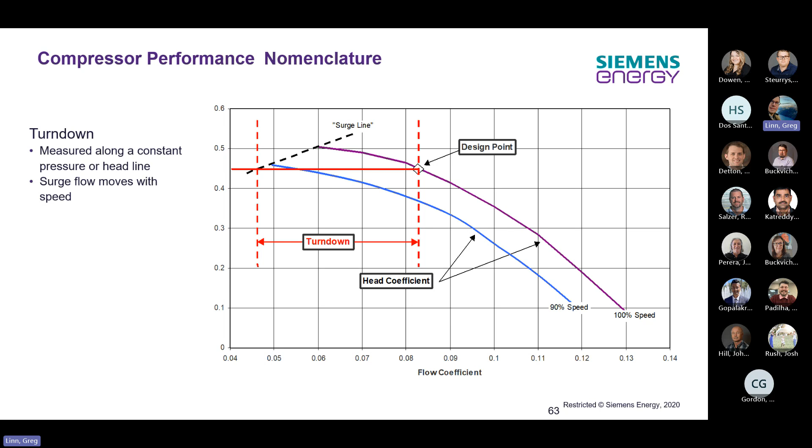The surge line - the more sloped it gets, the more stages you have. So if you have a lot of stages, you'll see this thing tipped right over. If you see a bend in the surge line, that means one impeller is controlling surge in one area and another impeller is controlling surge elsewhere. It's not wrong - you can have a kink in the surge line, that's where one stage takes over the surge. So stonewall to us - depending on the volume reduction of the machine, you can have different stages control surge and overload. So we go through that rotor capacity.

I want to do this - hopefully this clicks. So this is the basic curves, the effects on performance. If you increase mole weight, decrease temperature, or increase pressure, that curve will go up - you'll get more pressure rise out of the curve, and it'll increase capacity slightly. If you decrease mole weight, increase temperature, or decrease suction pressure, that curve will move down and to the left. This is a discharge pressure or head curve.

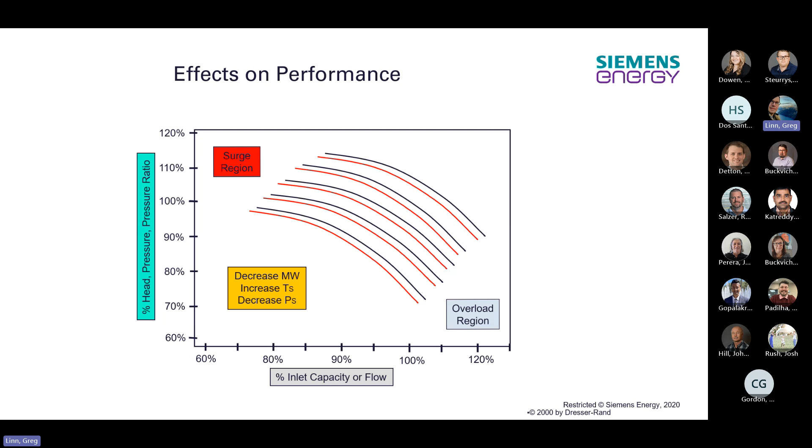I like to use a lot of examples, and I have tons of examples here - I could talk about each one and show you what's going on, but we don't have time since we're running out. This is a suction throttle effect on an actual compressor for discharge pressure. You can see on the top left, the blue, red, and green are different suction pressures. The polytropic head curve is right on top of each other - we didn't change the compressor, that mu u squared over g component is identical, but we changed the conditions the curve was run at. So you get a change in discharge pressure, a change in power, and the efficiency is essentially the same - a little bit of a shift there, but if that was drawn all on top of each other, I'd feel a little bit better.

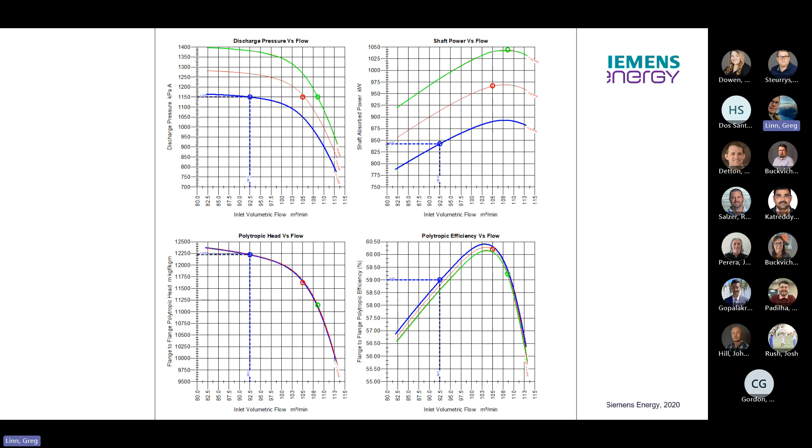This is more about suction throttling, if you get this and want to read through it. It's showing that API drives us to have problems in some areas. API says you have a certain speed margin and a certain power margin. API allows us to use suction throttling to determine if we have the right amount of head.

What this is showing is that if you were to use this compressor and test it, this compressor tested 6.5% high in head. If you don't use suction throttling to evaluate, you're going to have a 6.5% high in head, and you're going to have a 6% high in power. Okay, that fails. But if you use suction throttling for the same exact condition, you don't run to where they wanted it, this is where it ended.

If you use suction throttling, you move to the right because the suction pressure goes down, the volume increases, so you make less head. You're out further on the curve, you make less head. You're only 4, 4.5% high in head, which is within tolerance - you can be 5% high in head. And you only have a certain amount of power you can be - you're 4.8% high in power, and 7% is allowed on fixed speed. I like this example because it gives you a direct, numerical sense of how suction throttling helps you. It's more efficient than fixed speed mechanisms like discharge blow off.

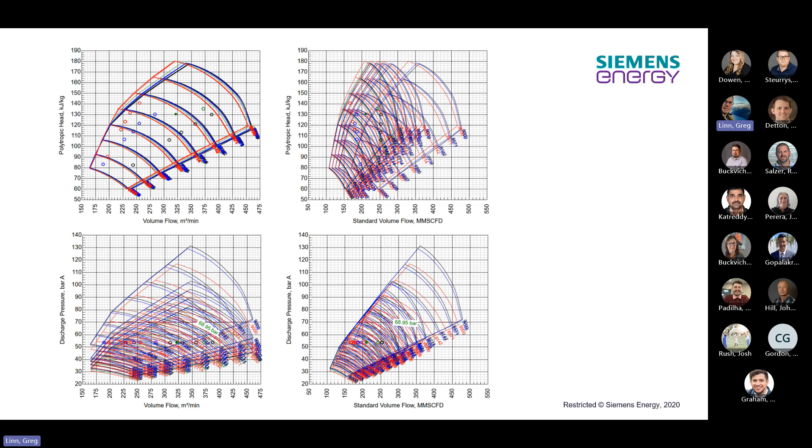On the head curve, they're the same. But discharge pressure versus actual volume is just a mess - you can't really even tell. You can see the groupings of these points are closer when you talk standard volume. That's why customers typically give you standard volume - that's what they measure. They're measuring a weight flow, not a volume flow.

I've got lots of curves in here, with stories between each one of them. But let's see - the last thing, I think maybe two more slides to go, if you bear with me.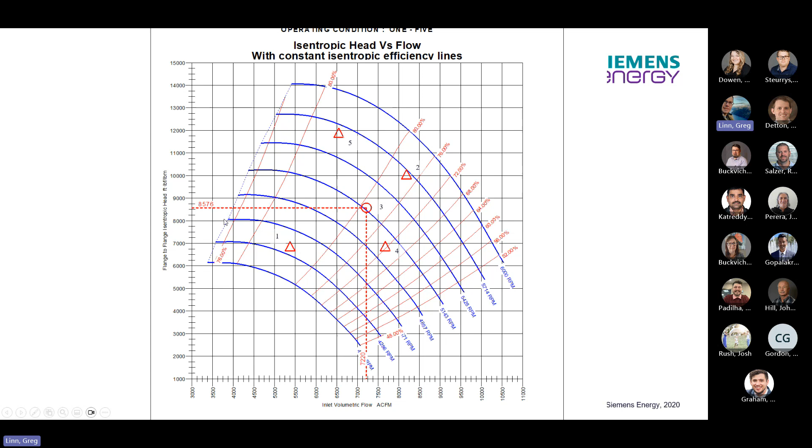Okay, this one's a single stage impeller. So, or stage - let me see if I can find a multi-stage one that shows it. I don't have a lot of them. Even that one doesn't have a lot of turn to it.

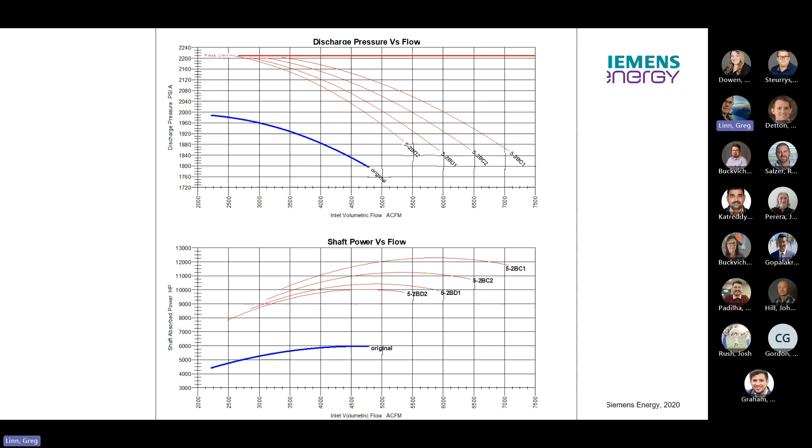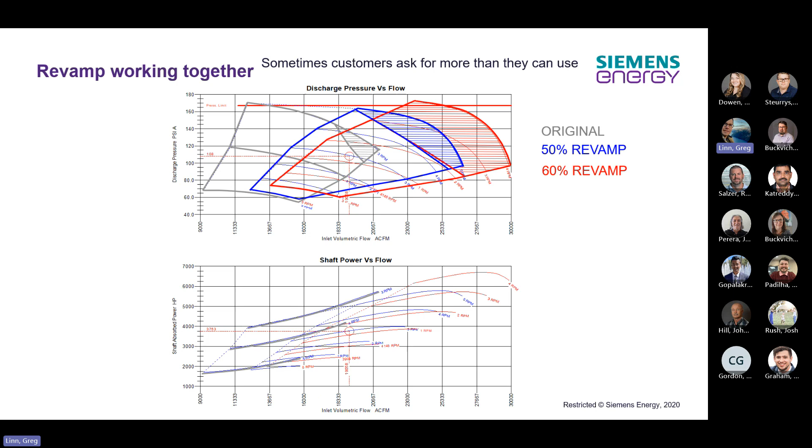Here, you can kind of see it in that red curve, you can see the kink. This looks narrower than the middle, and then that looks narrower because this is dropping off. That curve shape is called volume reduction, and it's the key to creating a wide operating map.

I want to teach you this. Inside the compressor, you have 4 impellers, 4 stages. At a design point, what happens on that first stage is you have an exit pressure, temperature, and therefore volume. There's an inlet volume, that one we know because it came into the compressor, and then there's an exit volume for that stage.

That becomes the inlet for the next stage, so you plot the next stage. It has a lower volume, and you're running at the same speed, so you have this head curve. These 2 curves have a high head profile. These last 2 impellers have a medium head profile, a little bit less head out of those 2 stages. Maybe they're lower diameter, for whatever reason there's less head coming out of them. But this is the design data point for stage 1, stage 2, stage 3, stage 4. You can see the volume is reducing.

So it seems like a common sense term, volume reduction. But the effects of volume reduction is what you struggle to or strive to understand, to know what's going to happen. If you change the flow rate on the left, you can see you still hit on that primary curve, entering on the black curve. If you lower the flow rate, this curve unfortunately lowers it too much, almost to the surge point, so you cannot see the effect multiply.

You're going to see this on the mole weight example better. But as you reduce the flow rate, you're going to make more head with that first curve, which makes the pressure higher, and makes the volume of the second stage lower than it would be at design. So even if you move just a little bit off that point, let's say you were just here, and that was a 5% shift, on the next stage you will not be a 5% shift in flow, you'll be a 6 or 7. The next one will be 8 or 9, and the next one will be 12, 15, something like that. You will essentially run out of range faster in a multi-stage selection than you would with one stage. That's the volume reduction effect.

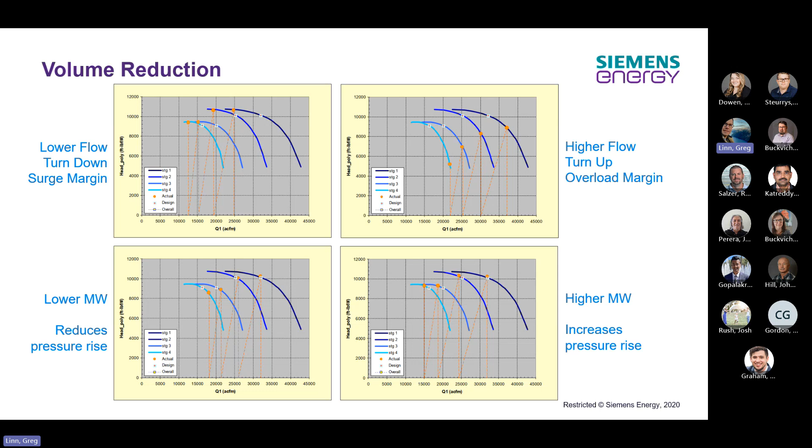The bottom one is mole weight, so I put this on one, I thought I had two. The mole weight one shows it a little bit better, and that's on the bottom there. A very small change to the design point, actually I think they tried to make it the exact same one, but it's a different mole weight. So the compression is different, and it actually makes an effect on the volume reduction. You're not in the same area on the last stage as you were on the first.

This is the effect of high volume reduction and low volume reduction. It changes that curve. That's the same impeller, or same compressor, right there, with 3 different curves based on volume reduction. One is designed for it, and the other ones are not.

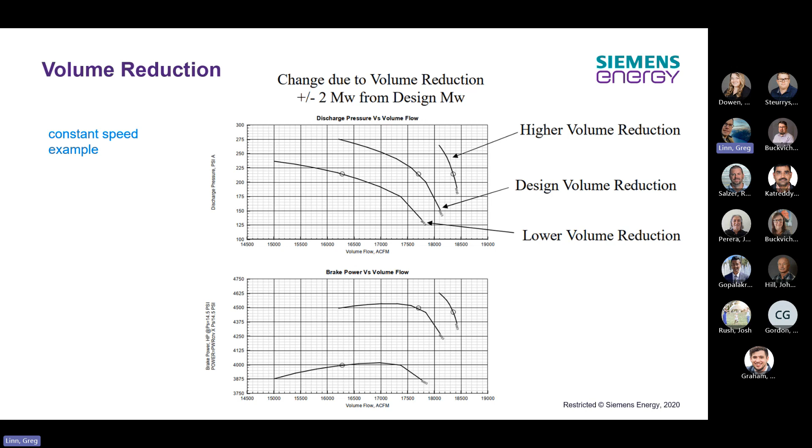The only thing I need you to take away is that impellers, the back sweep portion of the vanes, the aerodynamics is going to make a lot of determinations. For us, if it's truly radial vane, 90 degrees, you don't see those much. They're very high head, lower efficiencies, and back sweep is how you get a bit better efficiency at a better range. So you'll see a lot of back swept vanes. This is what that's called.

This is a nice slide that Tang put together that shows what happens if you go with more or fewer vanes, or if you change that angle. It changes the head curve and the efficiency curve.

Now I want to teach you one more term. The purple curve is the head curve - I can tell because it doesn't droop as it goes towards surge. The yellow curve is the efficiency curve, and it usually has a peak in the middle. So what's that other line? That's called the work input. It's simply mu divided by the efficiency.

The work input line, as you'll see on Tang's slide, can change its slope significantly based on the vane discharge angle. I'm not sure I buy into the way Tang set this up, his calculator, because he assumed the efficiency would stay consistent. If you look at all 5 charts, the efficiency is the same.

I can tell you the efficiency for a radial compressor is lower. Efficiency and head are linked - if you alter something that affects the head, you will affect the efficiency and vice versa. The work input is the health monitor of head and efficiency. So if you plot that work input and it has a kink in it, you've got a problem. It's usually pretty straight, and the slope of it determines a lot.

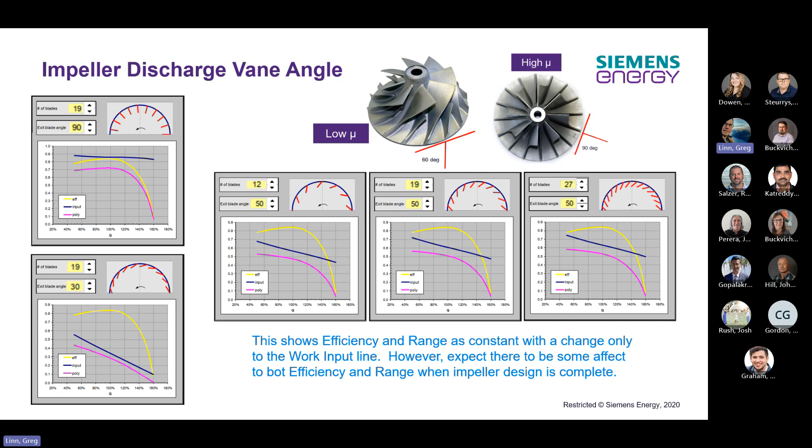I put in the notes a discussion I had with Greg Hoke. I went to him and said, 'Am I right about this?' And he said, 'Yeah, you essentially are.' But he said if the efficiency was treated as fixed, the way it is here, then these principles in those graphs are right. So that's why we put it in there, just so you understand why the impeller has the shape it does.

Can I add that the work curve is very useful for diagnosing performance problems on test? If the work curve is where you designed things to be, it means your impellers are doing okay, and your problem is elsewhere in the station - in the diffuser, return channel, somewhere else. So if you calculate your work input and go to the test stand and your work input slope matches, your impeller is good, and you're looking for a problem somewhere else.

That's how we found choking at the top of the return channel, because the turnaround was not opening up. It probably had a big kink in that, right? It started to bend off the work input curve? No, the work input curve seemed okay, at least over the range we tested. It was more that our head was dropping off rapidly, and so was the efficiency. We were 10 points short of the design. Whoa, yeah, it was bad.

One thing we didn't talk about - I'm going to try to do this quickly since I'm getting close to the end. One of the big components to performance we haven't talked about is the balance piston. I took that slide out purposely, but if you create pressure, there's a pressure differential - high pressure at the end and low pressure at the beginning. So your compressor has a natural force on those stages that's going to drive it one way or the other, right out of the compressor. You have to balance it.

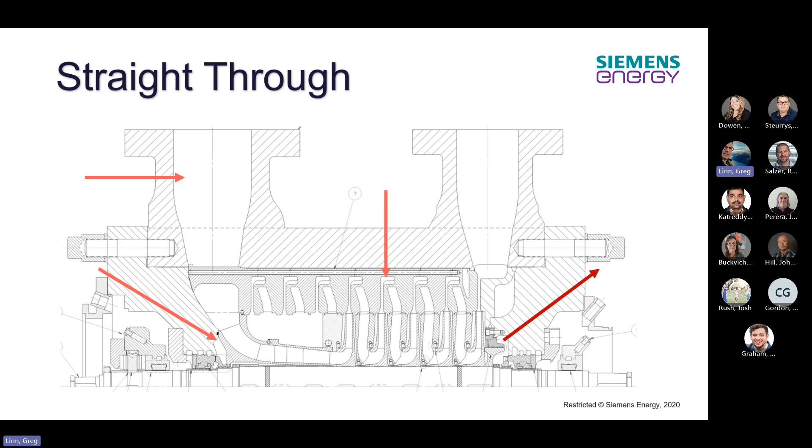So if you're ever wondering how much wasted power you're going to have and you don't know your balance piston leakage, somebody says, 'Hey, I'm using this stage and it's this efficient,' you're going to do this by hand. Just know that you're going to have loss, so you're going to have 3% additional power just from that.

Okay, this is in a compound machine. It's very, very similar, but it adds a couple different areas that it can put in. It can come to the compound return, it can come to the compound discharge, or the natural places like straight through.

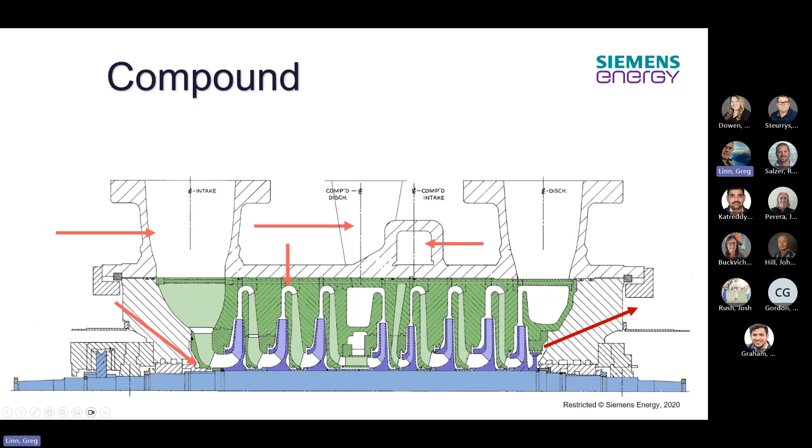Everything has been done. The back-to-back compressor has 2 recycle paths. The one in the middle is what we call a division wall. People can still call it a balancing drum - that's essentially what it is, or a balance piston - but we call it division wall just so that we know we're in a back-to-back.

That path comes out, no work gets imparted into it. It goes out the diffuser, out the volute. So you have to size those things properly. You have to size your cooler if it goes out and gets cooled, and knockout drum, and then returns to the compressor. So you have to size all these for that amount of leakage.

That amount of leakage can be between 4 and 15% of the total leakage. I've seen this to be a massive amount, so it's not something you should overlook. It comes back in and it goes through those 4 stages of compression. So this arrow goes through the back section.

The leakage here, because we balance the gas seals or the oil seals or whatever the main process seals are, we balance those. And so we have gas that leaves this and it balances usually to the other end of the compressor. We almost never do this, although you could. If you do that, you're going to have a little bit of a problem with your seal setup - your seal system has to take that into consideration.

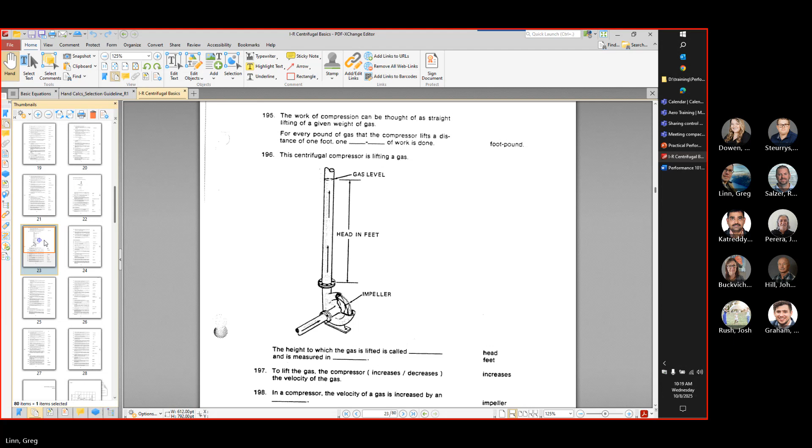So there is some self-help stuff out there if you want it. I can get you the centrifugal basics from IR. That's even lower, the basics before we even get to the compressor. This used to be day 1 of AE training. I like it because you can still take it, although it's really, really old.

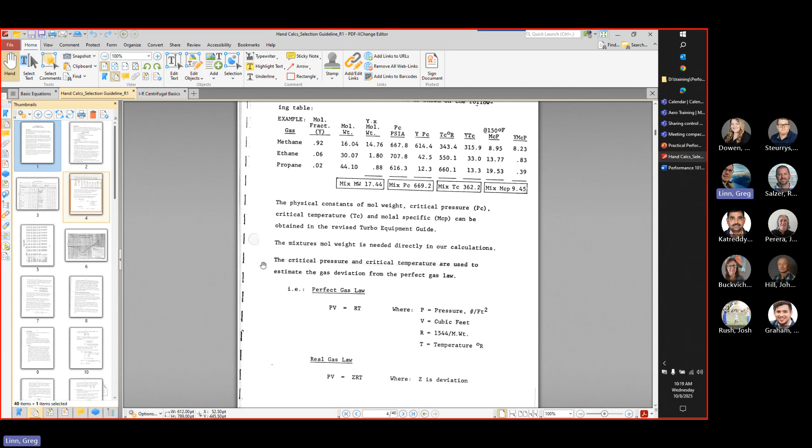Mother Nature didn't change. So this will walk you through a multi-stage selection and give you the spreadsheet to fill out, and it'll walk you through how to calculate all that, so you can determine how many impellers you need, what size compressor you're going to have, and how many stages you need to hit the conditions.

This is the handbook. You typically do this on your own, spend 2 days doing this, then you get a hand calculator. That was in the presentation—that's in Excel, so you get an impression of what it's doing. Then you don't ever have to pick a calculator up again, you just use that. Once you get an impression of it in hand calcs, then you go to SmartPerf, and day one of SmartPerf we can just jump into it. But if you do these two things first, you're really going to be prepared.

I would highly recommend it. I give these assignments—I don't know if Luan's still on. I didn't pick on him, but he's a new employee in our group, doing upgrades right now. I gave him those, and you can't do it without asking questions. That's how I gauge whether he's ready to do performance yet. He got busy doing other jobs, and he never asked a question.

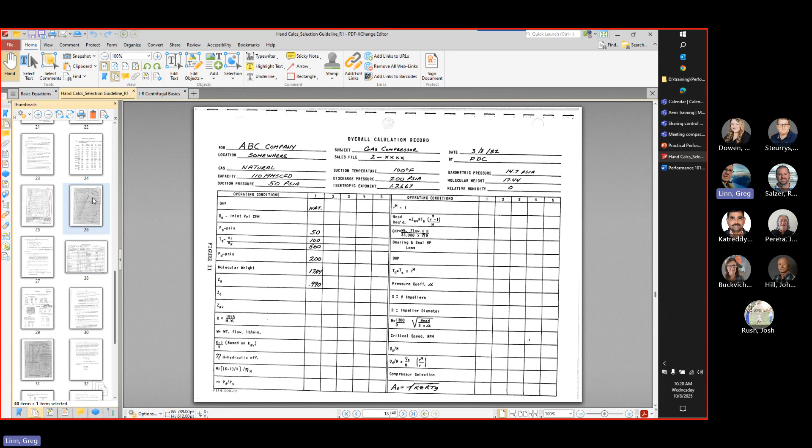You can't possibly read it—it's 40 pages of really intense stuff. They get into crazy stuff, corrections. They get into gas properties, getting K's and Z's. They actually walk you through how to calculate a K and a Z on your own. Who would ever do that, you know? But yeah, John does.

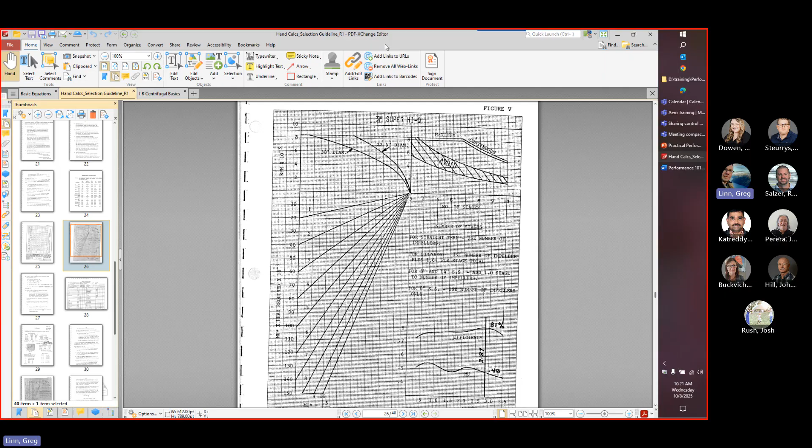So there is a next step if you want to go further, and then we can certainly have further classes. We're going to be doing it for Luan, so it's not like you're even putting us out. We're going to train people to be an AE in the upcoming months. So if you want, reach out, join the efforts, and be a performance application engineer. It's great.

Peyton, you need training. Okay, anybody online got questions? I appreciate you sticking around till the end. Thanks, Greg. Thanks, Greg.

Yeah, hey Greg, great presentation. Did you say where we could find this document online? Do you have a SharePoint for the stuff you're going to send out to everybody?